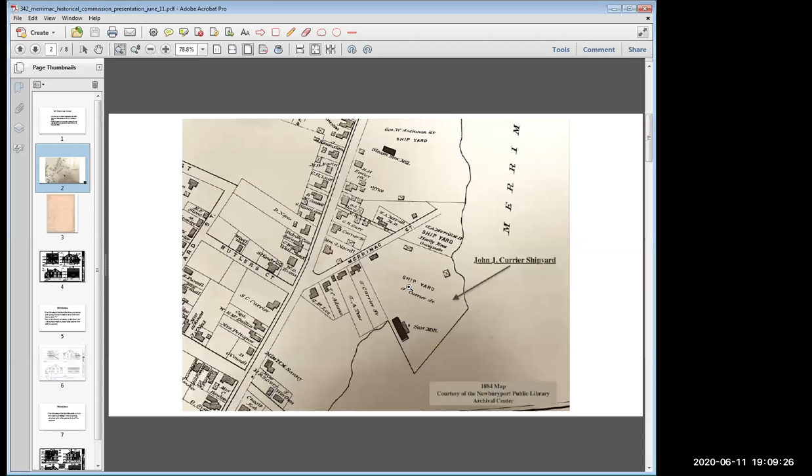What was the date of that one? That's 1884, Chair. So if you go to the next one, there it is, the portico. Is this the so-called Sanborn Map series? That's the 1924 assessor's map. Okay, thanks. So that does appear there.

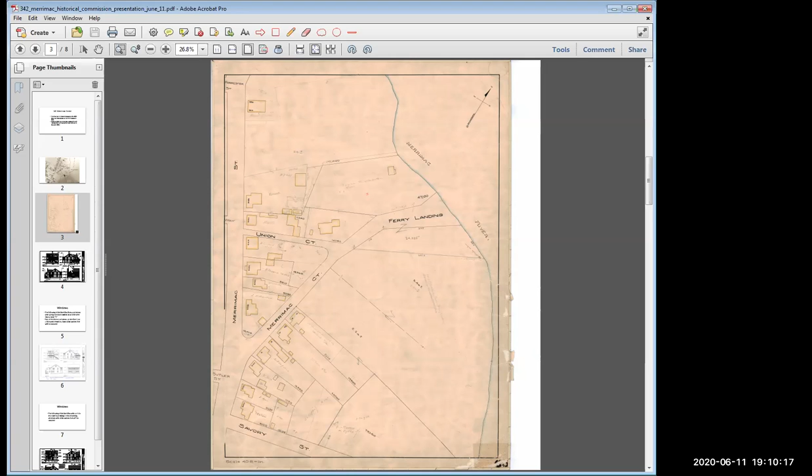Obviously I don't know the exact date of it. The indicators we have are that it was built in that time period, and the historians that did the Form Bs that were reviewed by MHC believe it was built, added after 1900. So Andy, if you could go to the next slide, please.

Thank you. So again, the applicants heard the board, the commission, loud and clear last time, and certainly understand some of the concerns the board had. This plan marks the proposed areas of demolition. Obviously the decking and the extra egress in the back, the two-story shed structure that was later added, all of you I think saw that was needed to come down, so as to expose the gable end of that original L.

We are proposing to take the portico down. That's our preference here. We are leaving the original door on the right-hand side of the building as you face it, with the transom, that's not going anywhere, it's staying right there. We do propose, as you said Mr. Chair, to remove that window to the right of the door, and I'll have Mr. Curie, the architect, go over that in a moment.

And then on the front of the house, the door is not original, but the side lights and the framing around there are. So the applicant is not proposing to change that out as he originally was, but to change the door. And I think most of the commissioners saw that door.

The applicant is proposing to remove the portico. The applicant is also proposing that the later-added Brosco windows with springs be changed out, but that the older windows—which we don't believe are original because there are some screws in them, but are older—be retained. So we are proposing to do that. Andy, if you could go to the next slide.

It's, okay, in this page that Andy's now displaying, it's the one immediately to the right of the door. It's the right-hand one. You go to the drawing to the right of that. There you go. So you see where it says new kitchen window and the arrow pointing to that one. That used to be the same size as the one on the left with the hexagon, but it's 6/6 instead of 6/1.

Right, but it's still a mate to the window that's to the right of that, which is proposed. It's not there yet. That's a new addition that's proposed. Oh, okay. Yeah, correct. I have no problem with that. And Mr. Curie, this reminds me, seeing the detail on this, I believe in my comments back to you guys...

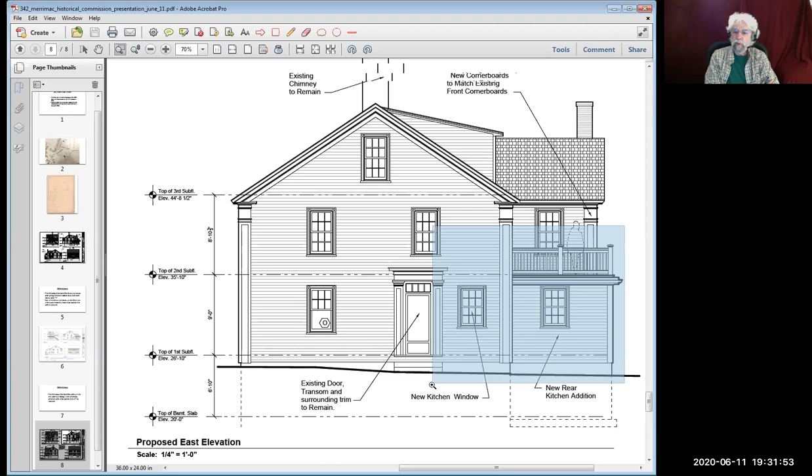If I can be so informal, the standards for putting an addition on a historic house suggest, or recommend however you want to word it, that you not copy the historical trim and molding so that the new construction can be distinguished from the original. So have you thought about how you would accomplish that by not having identical Greek Revival trim on the windows, for example? Just having, let the new addition be a new addition and recognizable as such, so it's distinguished from the original house.

Yeah, oftentimes you encounter that, and it seems to play out differently with every project. There are projects that we do... the best phrase I have is stealth architecture, that somebody, an architect from Falmouth, used once in doing some of his projects, and I know that's not quite the standards sometimes within preservation.

So we have a straight corner board there. We didn't copy the corner board in this instance, and obviously the one-story piece is different with the roof. That's a different element. If it was taken away completely, also as part of the standards, this structure, the original structure would be as it is, intact, and would not have changed. So the jog in, we feel it was nice to separate those planes. The jog out on the other side, slightly out, was a good way to separate this building.

The only thing that is a copycat, I guess, is the trim around the window. And perhaps we felt that was a 2020 nod to the originals.

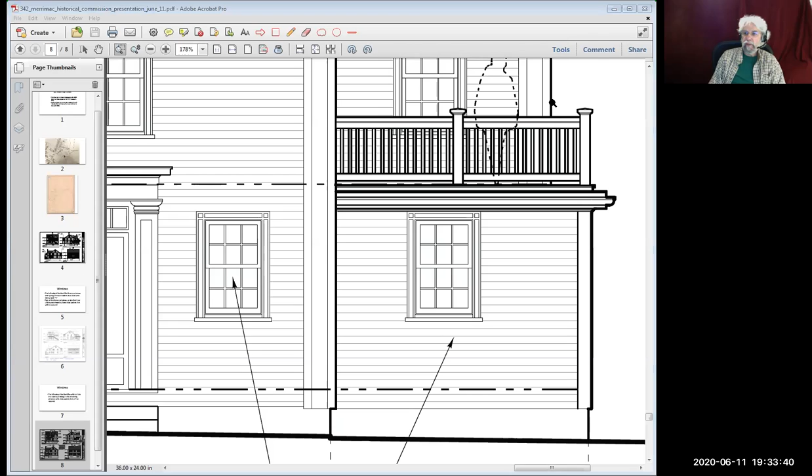All right, and I see Patricia has a hand up, and Ron, your hand is still up. Did you want to add anything more, or is that it? Oh, I'm done. Okay, Patricia, your hand, I think, went back up. Did you want to comment?

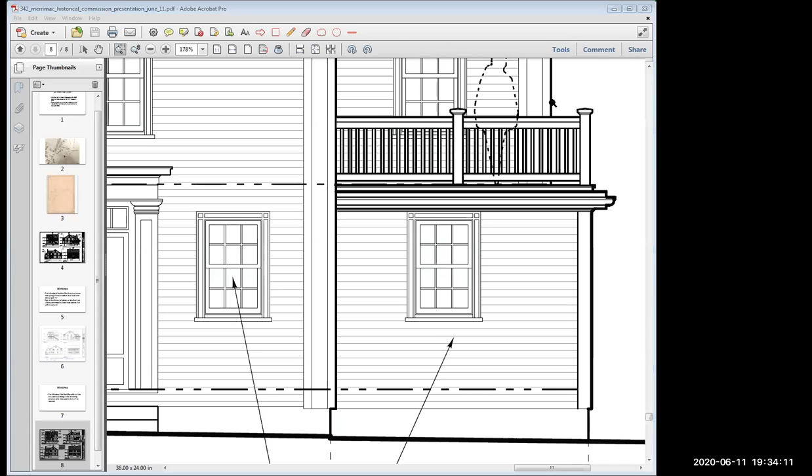One of the things I wanted to hear from everybody about this window—I would find it difficult on a preservation restriction to see new windows being cut or the dimensions being changed. On the west elevation, I noticed there's a new side entry. I like the bracketed overhang. I think even though the door is being cut into the 1880s addition, I don't object, but I'm happy for someone to explain why I should.

And then in the front, last meeting, Mr. McNamee and I were both talking about preferring a single window. I think that you, as chair, and maybe as I heard it tonight, Ron, think that this three-part window, since it did exist on Greek Revival houses, is also appropriate. But I'm wondering what other folks are thinking about those three things: the new door in the west elevation, demoing the historic window on the east elevation, and then this front window. I don't know if we resolved that yet.

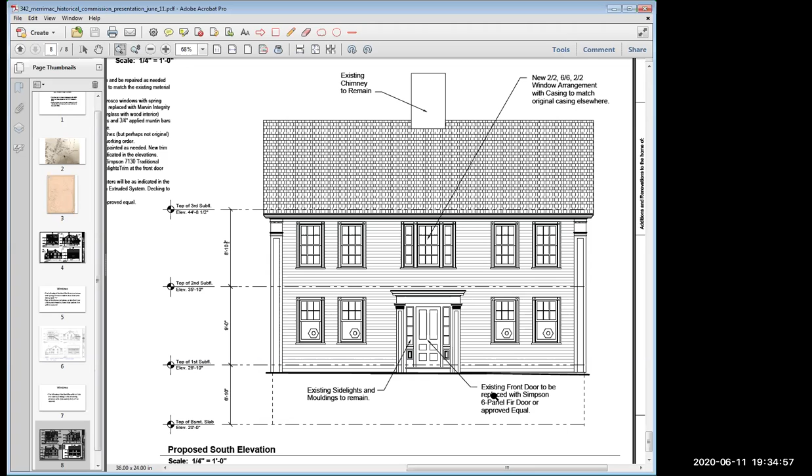Mr. Curie, if I remember correctly, the door that Patricia is referring to is where you're opening a window opening in the rear. Today it's a window and you're making it into a door, is that correct? That's correct, on the driveway side, where there's a mud room. Does that jog in slightly on that side? I can't remember, no, it's more or less flush, maybe inches, but there's trim there, that corner board, that pilaster type thing.

Anybody else on the commission? People have been fairly quiet. I don't see any other hands up, but I want to make sure everyone's had an opportunity to speak if they'd like to. Mr. Morgan, I see your hand come up. You're recognized. Yeah, thank you, Mr. Chair.

I'm questioning the treatment of the windows with the new Marvin fiberglass with simulated divided lights. It seems we're saying that if this is a preservation, and we've decided not to keep the portico, there's some interpretation of this as also being a restoration, a historical restoration. In conjunction with the guidelines for historic windows, I think we'd want to see a restoration of any replacement windows here. If we replace a window, assuming we're not preserving it to its 1980s vintage Brosco series, then we'd want to restore those windows in a more historical material and design, which would be solid wood and true divided lights. That's my major comment. And I'd still want to see the chimney looked at structurally for possible rehabilitation also. Thank you.

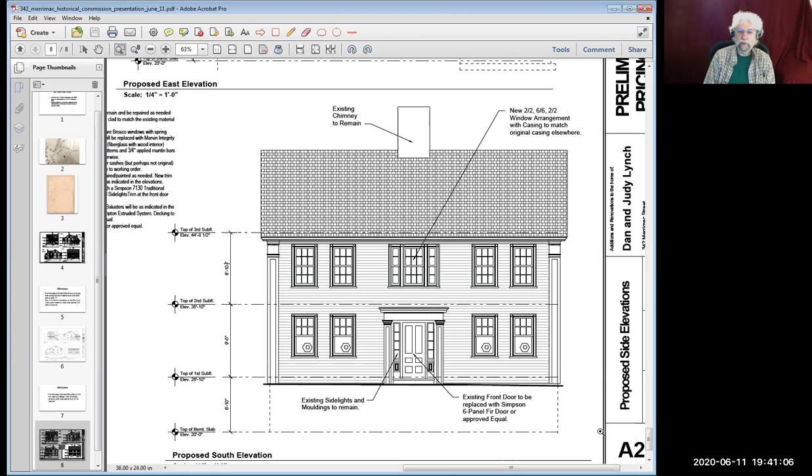It's more of a restoration than simple preservation, because no one is really interested in preserving a non-historic, later-added feature of dubious value, such as those Brosco windows. I don't remember offhand, maybe Mr. Keary or someone familiar with the specific windows can speak to it. Let me see if it's my window.

I can see it's partly cut off, replaced with Marvin Integrity fiberglass with wood interior. So I assume the exterior is fiberglass, the interior is wood.

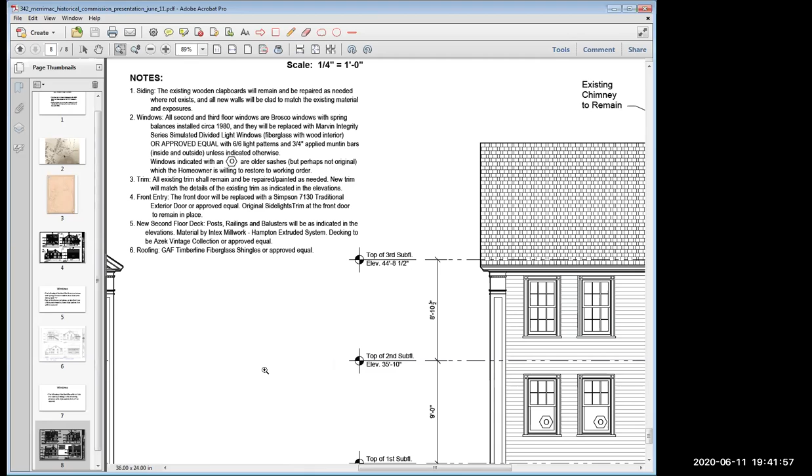Applied Muntin bars, so it's not true divided light. Is it like one thermal pane? One pane of glass that has applied Muntins, and are there any internal spacers, or is it just applied on both sides? Correct, both sides with a spacer bar, so it is what's called a simulated divided light.

As prepared. Do you have any specs in your plans as to what the profile of the Muntins are? Mainly on the exterior is what we're concerned about here. It's a putty glaze look. We don't have that in the plan, only the spec, not a detail of that window.

Patricia, I think your hand's been up for a while, did you want to jump in with a comment? No, I just wanted to second what Mr. Morgan said about true divided lights and applied Muntins—it's sort of cringy to think about that—and also what he said about the chimney.

I also wanted to say that Bob Yarrow, the urban planner mentioned on the updated Form B, is now at the School of Design at UPenn. He said he was pleased to see the Lynch's plan for restoration of the front and side facades of this house, which has a very special character and history, and he was amused to be listed as a person of great renown on the updated Form B.

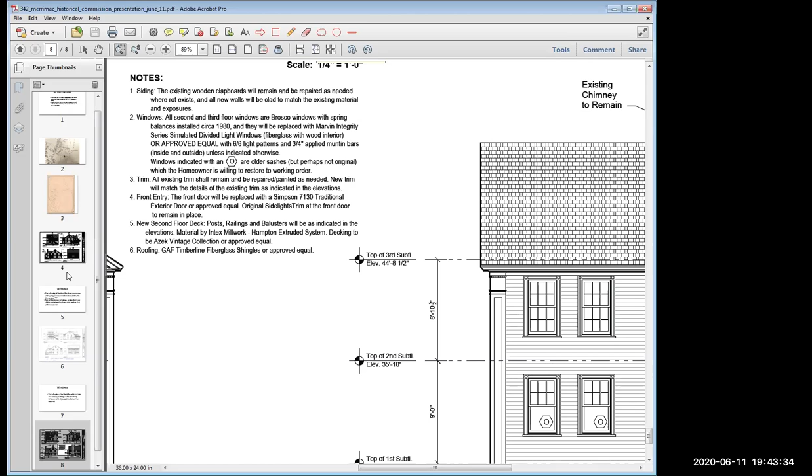Thank you. Mr. Chair, if I could answer a couple of questions—my clients have agreed to keep the kitchen window. You can make that a condition of the decision, since that plan will have to change, so that kitchen window on that side would stay, and they'll make the adjustment on the interior, as I'm sure you're familiar with.

And I think Mr. Curie has the dimensions of the Muntins for the windows above—David can speak to this. So all the ones that are not original but old on the first floor at the street level are going to be restored, right? And those are the public view and most easily accessed.

There's some work to be done, certainly for insulation, when you're redoing a house and trying to update it to reduce problems with air infiltration. The commission in the past, and the city generally, has been okay with these windows, particularly that Marvin Integrity series, where you have wood on the inside.

And since it's the putty-like, 3/4 inch raising, and they're on the second floor and not easily accessible immediately from the street, we would like the board's consideration of that. I understand where the board's coming from and what they're looking for, but in this instance the windows are Brosco spring-loaded windows on that floor and in other places.

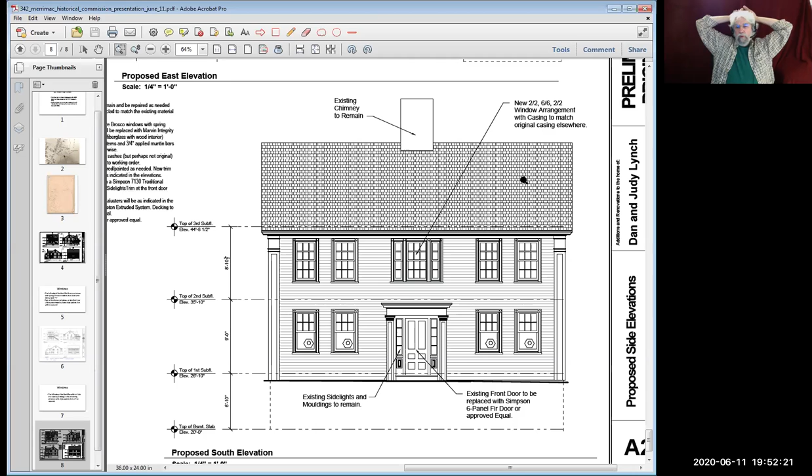I think, as Peter just said, the single window is preferable to the two fixed side windows, similar to, echoing what's below in the front door. That's a bit of a stretch, but I can sort of live with that. But I think the most authentic—or put it this way, the most reliably, historically, probably accurate—would be the single window.

So, it sounds like the sense is that I'm hearing a strong sentiment that the windows should be true divided lights, where there is such an emphasis on restoration here.

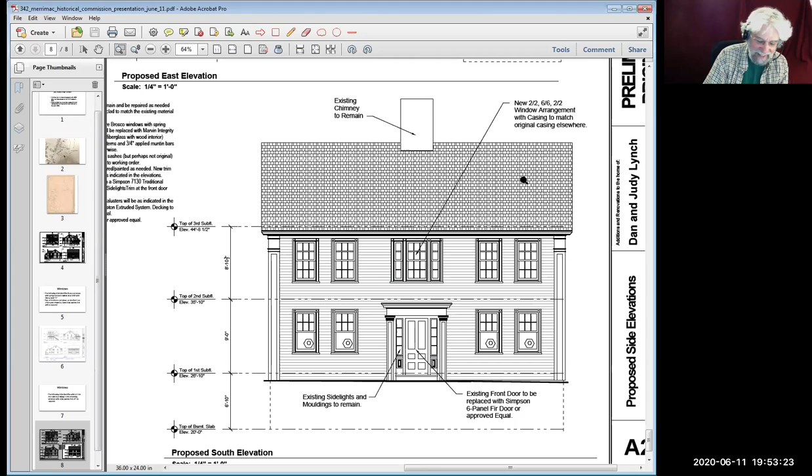So Attorney Mead, do you want to kind of help out here? So the applicant, may I just first say thank God for texts. All right, so the applicant will do a single window over the front door, and then he will also be willing to do true divided light wood frame windows.

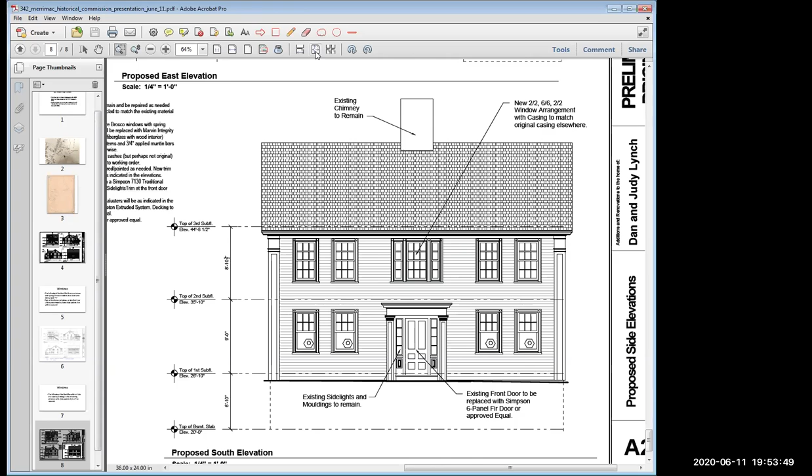And here's my question. Obviously on the front, as you go to the side on the original structure, there also. But on the back in the addition, can he have the choice to either do single wood frame true divided light or the Marvin proposed? Which windows are we talking about here, up on the dormer or the second floor? I'm suggesting all of those windows, he have the choice to either do the single divided light, the wood frame divided light, or the Marvin as proposed.

But I see, right, but on the front and on the sides of the original structure, if you have true divided light, the larger box, the original structure - unless you want it over that L, to have the divided lights.

Just let me clarify what we're talking about here. When you say that, it sounds like you're describing a wood framed 1/1 window versus the Marvin Integrity 6/6. No, the same lights, but the true divided - meaning wood frame, true single divided pane of glass. Correct, or that is 6 individual panes of glass divided by muntin bars.

On the front or the rear? I was trying to clarify the rear. On the rear, I want him to have the choice to use the Marvin Integrity window he has proposed, on all of those windows. Or what was the other option? Well, you're asking for true divided lights. Oh, I see, okay, so in other words, so it's simpler then - you're just saying would we permit the option to go with the Integrity series on the rear where it's not quite as sensitive? Correct.

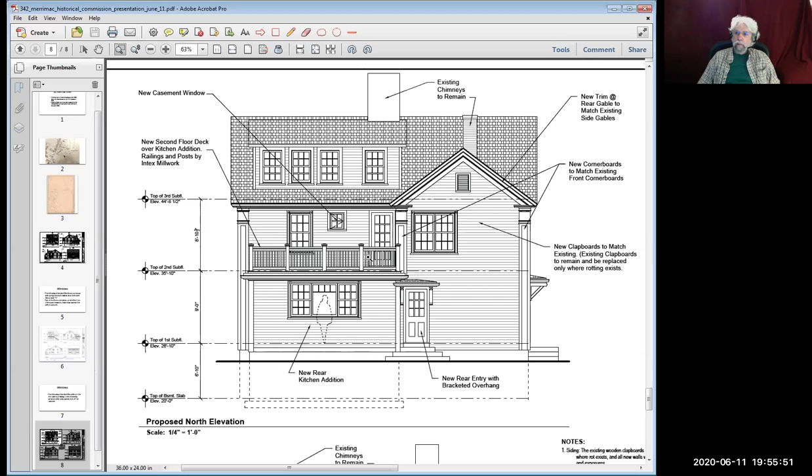Well, okay, especially in the new section, which would then be - certainly the kitchen addition, certainly without question you have the flexibility there.

So let me turn to our fellow commissioners, or at this point I think we could even entertain a motion, if it could be worded in such a way - we might have to tune it a little bit, it might get a little wordy, but I might take a stab at it. But anyway, how do people feel about that? It sounds like you have...

The main concerns we had coming into tonight were, starting with the smaller items, the window on the side, the upper right in this particular drawing we're looking at - that's been resolved in favor of preservation. The windows on the front and sides, the most historically and most visible sections, to have wood frame true divided lights per our preference. And finally, in the conjectural reconstruction of the front, to have a single window there.

So it sounds like at least the concerns that I was aware of going in have been answered. Does anyone on the committee disagree? Because if not, I'll try to word a motion to move this forward.

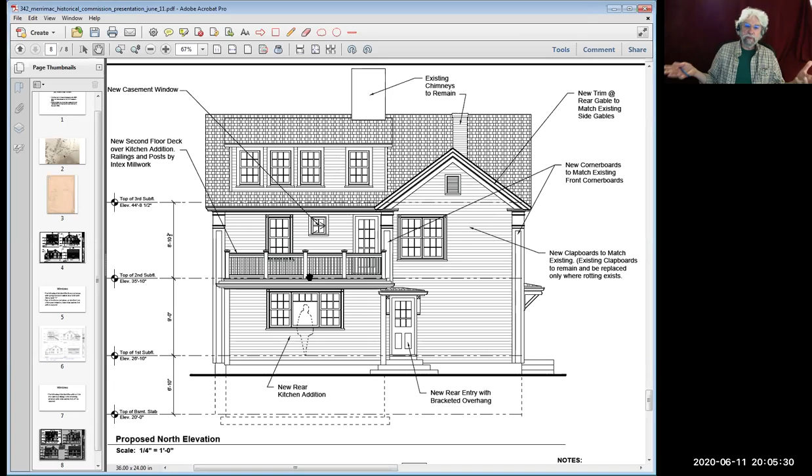The other windows are already newer replacement type windows. So what would be the issue with... the applicant would like the option of using the Marvin Integrity Series there instead of the full wood frame.

I apologize, but I'm going to interject again. I think Dan would be willing on that one 6/6 that is currently a Brosco to do as he's doing with the others, but the new ones that don't exist yet, being in the kitchen and up above in that gable, I believe those are the areas where he was asking the commission if he could go with the simulated. Thank you for that clarification. That sounds like that was Mr. Curie speaking.

Yes, sorry. So Joe, consistent with what you said a minute ago, where replacements that are not part of any historic section of the building could be Marvin Integrity or whatever, but the windows that are part of the historic structure and part of that restoration would be wood framed 6/6, true divided light, etc.

So it sounds like, and we would get this all down in writing too, that condition has been satisfied. If that's the case, would you be a yes vote? Yeah, I'm fine with that. Okay, now we're back to you, Patricia.

So yeah, I'm fine with that, and the single window over the front door, and keeping the east elevation kitchen window, but allowing the door added on the west elevation. So if that's all part of this, then yes.

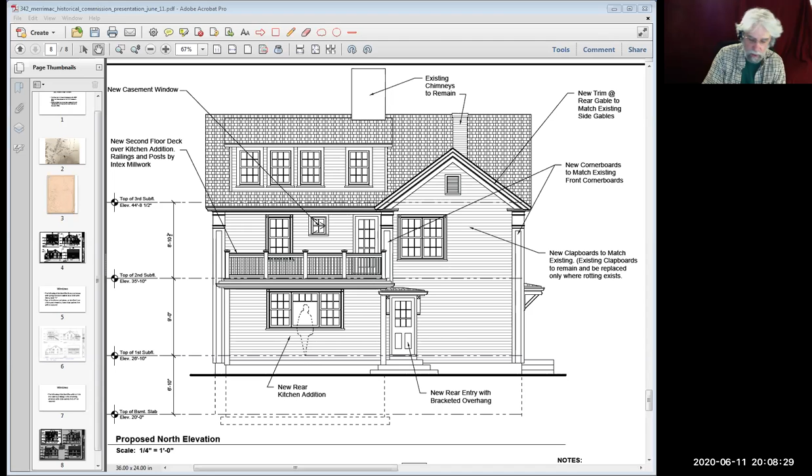So I'll follow up with you similar to the way we followed up after the first meeting 2 weeks ago. Is that acceptable? That's great.

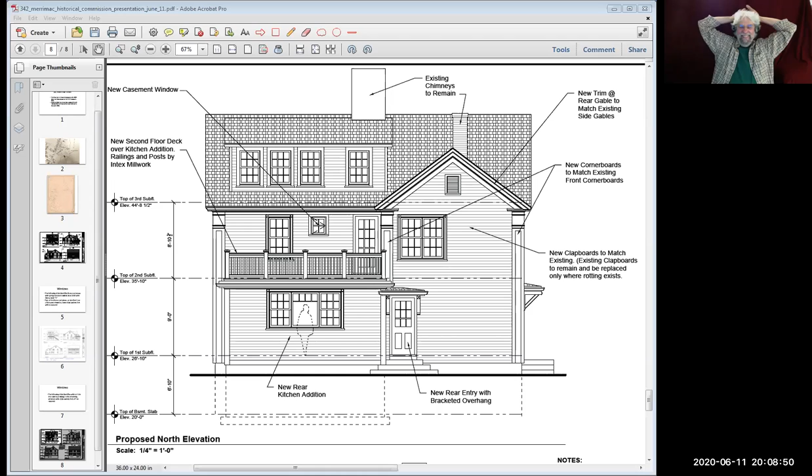And just so the commission knows where we go from here, this isn't the last you've seen of us, I'm sure you're disappointed in that. We will be going to the planning board now, and hopefully after they are done, they will make a condition that the Mass Historic and the Planning Historic Commission have to approve the final preservation restriction in full. So we'll come back to you when we have a draft of that document, all the appropriate attachments, and the revised plans according to your motion.

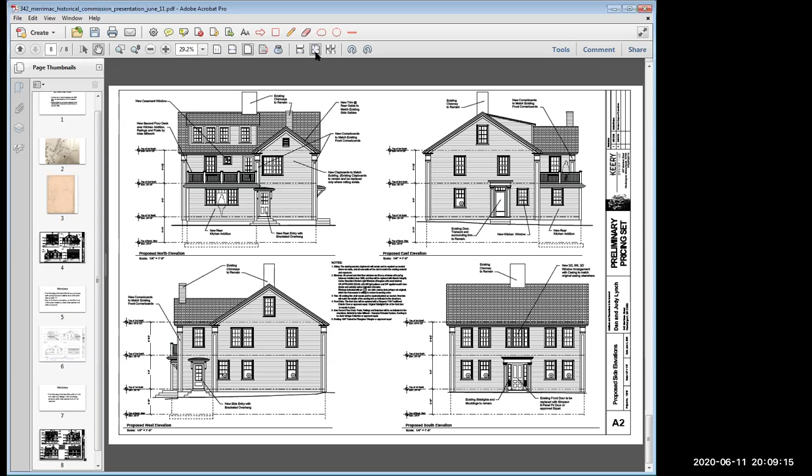Yes, and actually thanks for reminding me about the planning board meeting next week. So what probably will happen is I will share with you, I will draft a report for the planning board so that they know how we've resolved or decided to move forward on this.

And I believe you're correct that they will want to know all the details and make sure that whatever is to be specifically preserved is spelled out, and what's allowable to be changed, and so forth. So we'll do that the best we can. I know I'll be wanting to get that to them ASAP so they have it in time for their meeting next week. Thank you.

Okay, very good. Thank you all, that was a lengthy but important discussion. I appreciate all your comments and the thought that went into it, especially my Vice Chair Patricia, and Joe, and everybody really, everyone for your comments.

Let us try to move on now to 39 Harbor Street. As you can see, thank you Andy for displaying the agenda again. This is 39 Harbor Street, I believe, a residence on Plum Island, appears to be quite near the water, actually, from what I saw of the plot plan.

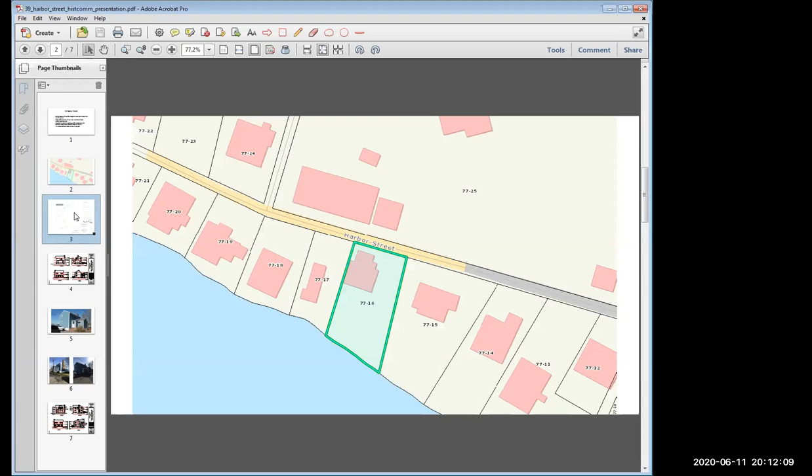So here we have the site plan, and if you can just zoom in, Andy, and show that second floor addition there, where it's indicated that it is within the same footprint. We're not expanding the footprint, and it's 164 square feet. Can you go to the next slide, Andy?

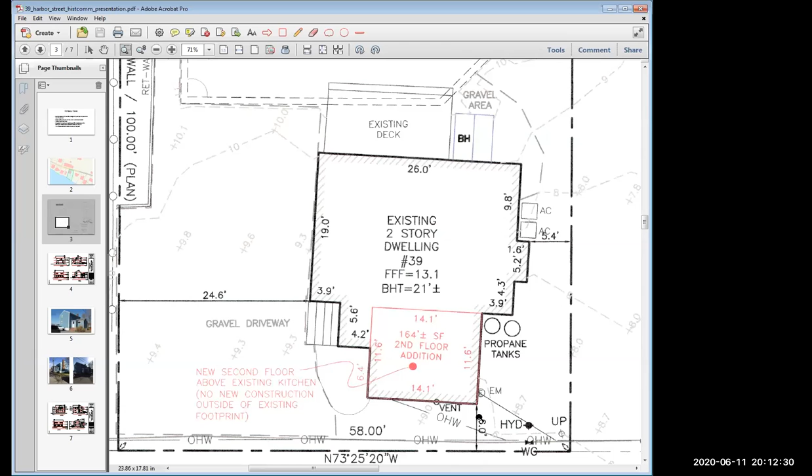And then the next slide, please. This is Andy, just folks, I apologize, there's actually a momentary delay when the image is changing, so apologize for that. Yeah, they're coming through pretty well, Andy. So it hasn't been a problem so far.

Well, thank you, Marisa. Scott Brown, the architect for the project. Well, there's not a whole lot to say about this small project. I think what we're doing here is very simple. I was very surprised to learn that this house is 120 years old. And while there may be some old bones there, I don't know where they are. The house has been completely reworked over time.

The house even has a concrete block foundation that we could actually see in some of the images that we provided, like slide 5. I don't think that this type of concrete block was even widely used until way after the turn of the century, probably more like mid-century. So this is an indication that this house was lifted up and likely rebuilt at some point in time. Can you go to slide 7, Andy?

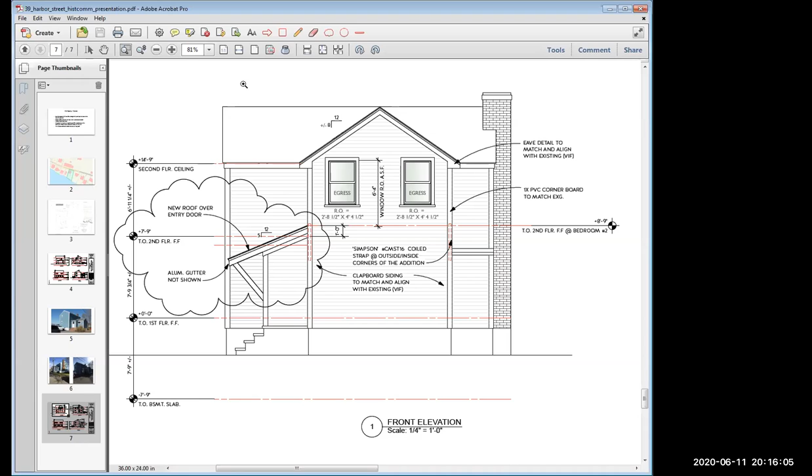Yeah, those 2 windows that we're seeing there, they're both labeled egress. That's our new addition, which is over the existing kitchen, which is going to remain intact. Okay, all right, thank you very much. Thank you, Scott.

So, I think this is, as you say, pretty straightforward. Does any member of the commission have a question or seek clarification or comment on anything that we've heard?

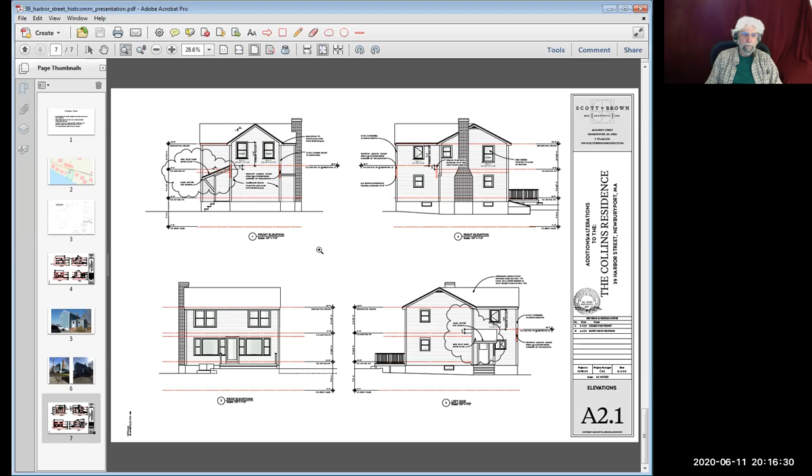Mr. Fay, I see a hand up. Yeah, I'm just, the small, is the large part, so my guess is, is the large part of the house the back of the house?

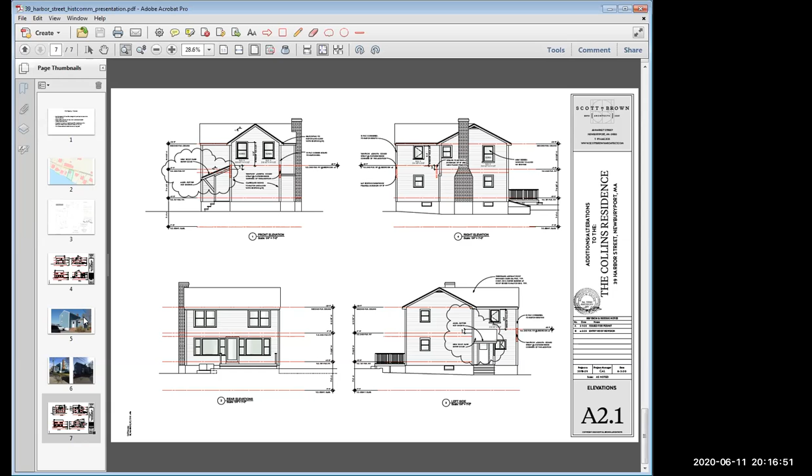Well, that would be the front of the house. That's actually on the water side. So if you can maybe pull up, Andy, pull up the site plan, maybe we could point that out. Yeah, so the kitchen is actually at the front on the street side, and the main box is on the water side.

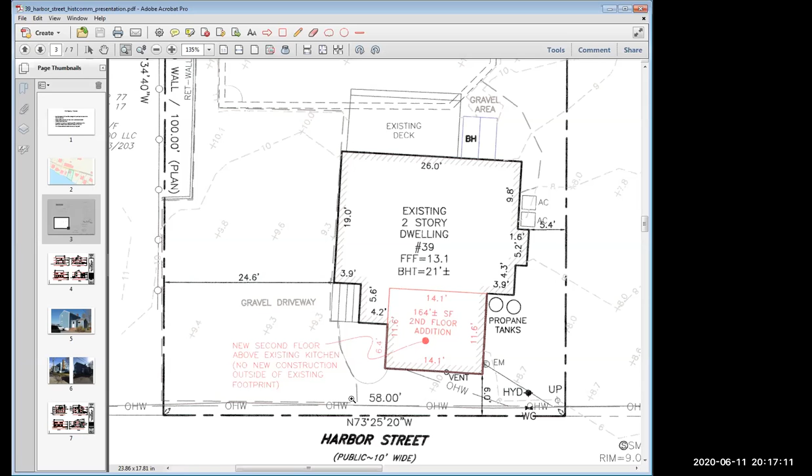Okay. Main box is the larger portion. The smaller portion is facing the street. Okay. Correct, yeah. All right. That's all, it's just unusual, I think. But yeah, it's a bit odd, a little unusual orientation, an unusual setup.

I'd like to think what we're doing here is an improvement from a massing standpoint. Because it does seem so odd that bumping that up in front, I think, is going to improve the appearance of the house.

Okay, thank you. And Chris, you can see in this picture, if you look at the lower right corner, I believe that is the street, and I even think I see a fire hydrant there. So you can see the view from the street - you've got the gravel driveway on the side, and what would be considered the main or front entrance is kind of facing sideways toward that driveway. That in itself not all that unusual, but the orientation is obviously toward the nice view and that sort of thing. Okay, great, thank you.

Yep, you're welcome. Any other comment? If not, I would like to make a motion that we determine that the structure is not historically significant. Anyone care to second that or not? This is Joe. I second that.

Okay, so I'll go around the table here, just going in the order people are showing up on my list. Ron, you happen to be on top again. Your vote, Ron? So this is on the vote on what now? On determining that 39 Harbor Street, the house is not historically significant. Okay, yes. Peter? Yes. Mr. Fay? Yes, I'll agree. Patricia Pecknick? Sure, sure.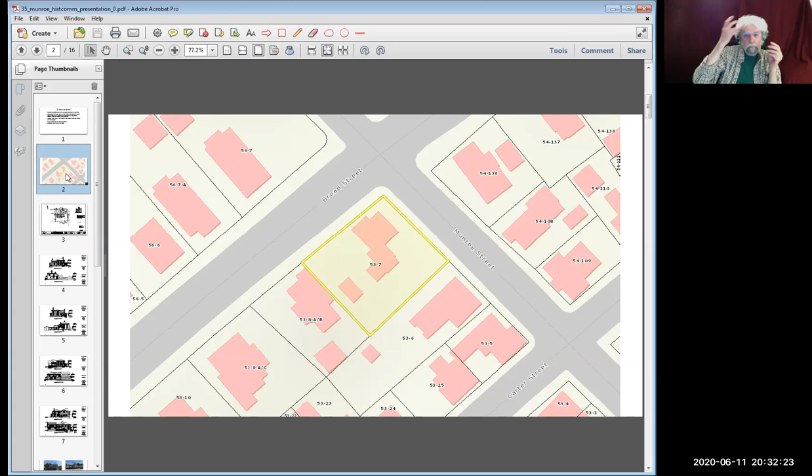So you can see from this photo, and then we provided some earlier assessor's photos, and the vice chair actually found an earlier Sanborn map for us showing that some form of this footprint, but for the later-added sunroom entirely off to the left, has existed over time. The district data sheets indicate that the structure was altered in the 1920s. Looks like some form of an addition near or around the same location existed back to 1894. The district data sheets indicate it has been altered in various locations on the additions on the back, certainly not the original box of the structure.

So presumably we believe the alteration occurred to the kitchen, pantry, and second floor bathroom that we're going to talk about -- and using the term second floor on that rear addition is being generous. There's a first floor sunroom off of that addition. That footprint of the sunroom is not on the 1924 assessor's map, indicating it was added at some later date.

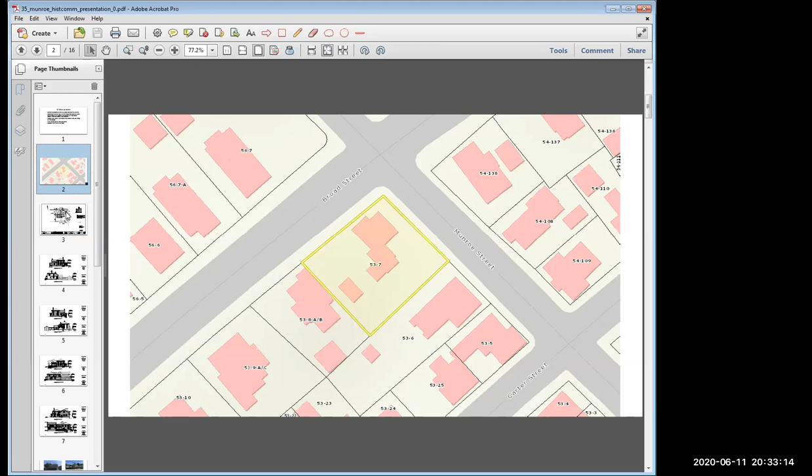So Louise and Eric proposed to demolish this two-story addition extending from the original structure towards the south, as well as the later added first floor sunroom.

The existing two-story addition is 2 to 4 inches out of level. The single-story pantry off the kitchen at the southernmost portion of the structure is sinking and does not have a foundation.

The pantry from the ceiling to the floor is under 7 feet. While one side of the pantry is on the same plane as the kitchen, the opposite side has a 5.5-inch step down demonstrating its sinking structure. It might be good now to go to those photos because they're pretty clear.

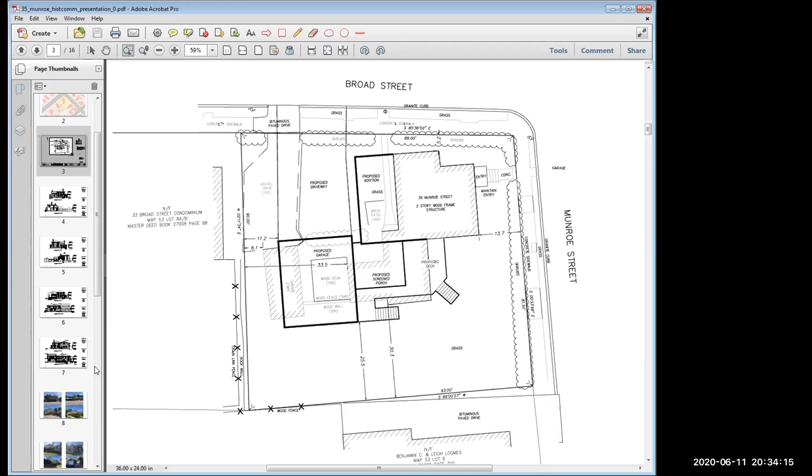So again, we have the photos from the neighborhood, and if you could go to the next set, we get a little closer up. So we're proposing—

The later added sunroom, you can see with the bigger windows, that was added after 1924. Then you have the little shed attached structure off the back with the L. Those are also proposed to be removed, and you can start to see how they have a foundation problem.

If you could go to the next set of slides, Andy. And again, we have a larger view, then next slide, 11. So then you start on the right. This is the engineer we hired, as well as Eric, who started to take photos of some of the things I'm going to describe to you.

So the roof over the pantry is not suitable for snow loads, and the window on the adjacent addition sits directly on the roof of the pantry, prohibiting renovation of the roof to support snow loads. If you want to go to the next slide.

So you can see here the kitchen wall addition that was discovered when there had to be a repair. It has bricks holding it up instead of wood beams, and you can see that in the center line. You can see the kitchen wall foundation that is failing.

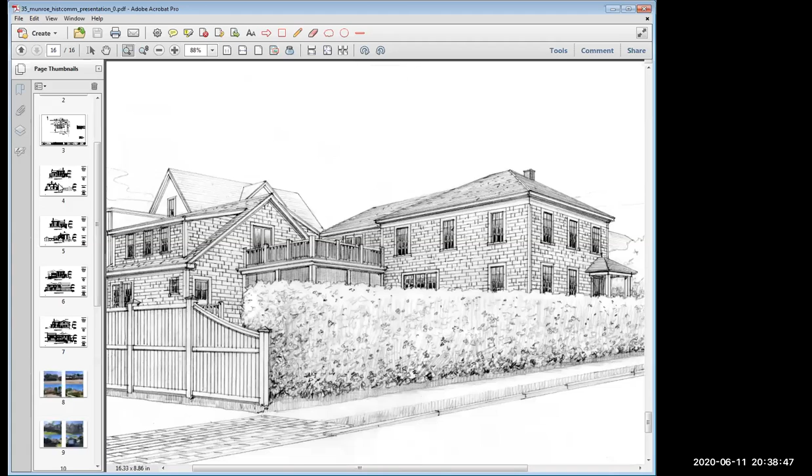So what I'd like you to do, Andy, is go to the architectural drawings - the line drawings. Well, this is the finished product, but if you can go to the line drawings, that would be great.

And I'm going to have Eileen talk about what she is proposing to do. Thank you, Lisa. So, Eileen Graff Architects, 2 Liberty Street.

So these elevations are a great place to start to help orient. Lisa has already given you the description of the corner. This front elevation, this top drawing, is the elevation that faces Munroe. You can see the original hip roof structure there, the 1850s structure. There's a one-story piece to the right, also part of the original structure. Then to the left is the structure that, in pretty good depth, Lisa has reviewed - the addition experiencing some structural challenges. And then of course the pantry is the one-story shed roof to the left of that addition.

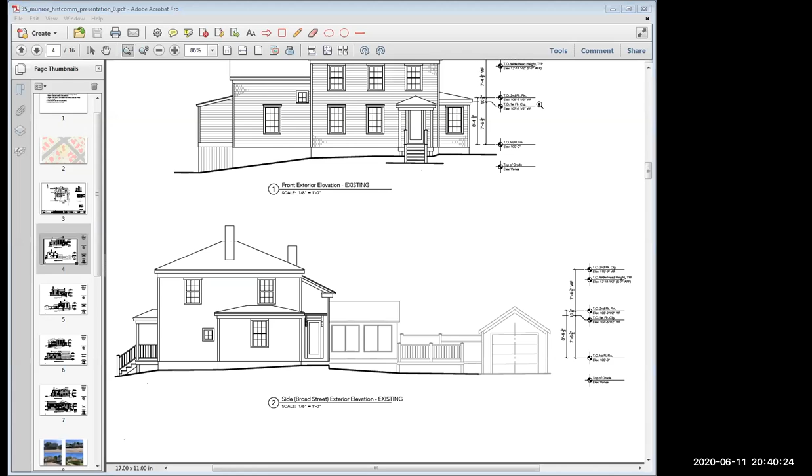And then if you slide down to the bottom drawing, you can see the Broad Street view of the hipped roof, the one-story hip as well, part of the original 1850s. Then the first piece you see to the right with the door is the gable end of that addition. Then those large windows are the sunroom, and a series of fencing and decking that then attach to the garage. And then we could slide to the next - everything looks pretty straight there.

So this is the view - if you had, is the backside from Munroe. And so what this actually shows, again, the hip roof helps orient you on the original structure. Then to the right of that is that addition.

What I want to point out in this addition is if you look at the edge between - see the double window on the first floor level on the original structure, and then you see the corner board of the addition. If you look just about 3-4 feet to the right of that is a dash line. What I want to point out is that from that dash line to the corner board, that piece was yet another addition. While the first addition, I'll say in the 1894 map, shows up from that dash line to the right, this dash line to the left, this piece that's sort of glommed on, shows up in the 1924 map.

So even though we see these forms as addition after addition after addition, there's even some buried in there. So what we feel is sort of an unfortunate addition there is that with this 3-foot addition, we lose the corner of the original structure by them glomming on more of this gable roofed addition.

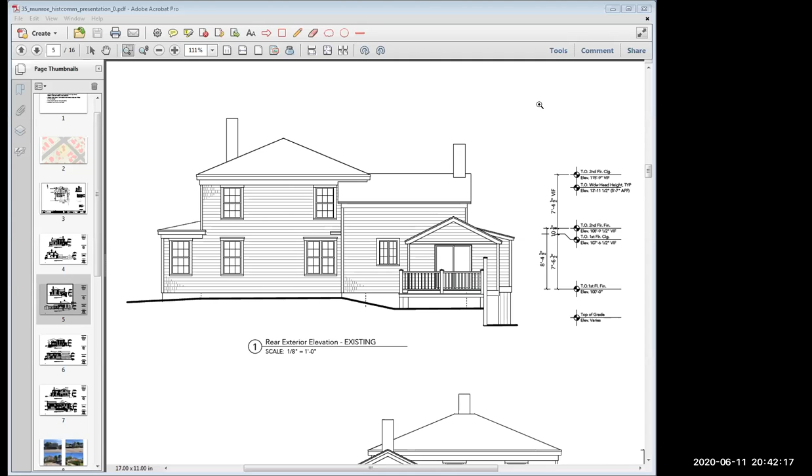Yeah, looks like that dotted line looks like it's where the original structure was, because you could see it lines up with the roof line above. Correct, that's correct. And it makes for really strange conditions on the interior as well, with that sort of a glommed on corner there. And then the bottom drawing here, as we've seen in photographs, a great assembly showing the evolution of all these additions.

But I want to pause on that bottom one just to help explain, as we've seen in some of the photographs - I want to give a sense of scale to this property, starting with the original hip roof structure. It's modest in height. The first floor is 7'6.5". The second floor ceiling heights are...

7'4.5". So if you look to the second floor 6/6 windows of the original, I want to point out that the sill of those windows is only 16 inches off the floor, with the head height of those windows at 5'7". To give reference, the modern day typical house is built with head heights of 6'8" - so it's a good foot lower than a typical modern day building.

And so if you travel to the left and you're inside, as Lisa mentioned already, when you're trying to get from the original structure to this addition, the doorway - as you can see, the gable roof there is lower in eave height than the original structure.

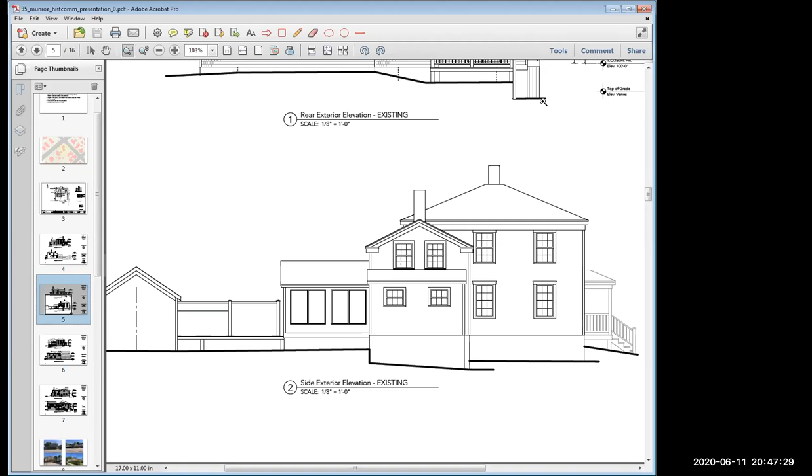And so we are proposing that we move this living space to the back of the original structure. So now if we could switch to a proposed drawing, that will help explain in elevation.

Well, while Andy is switching—Marissa, how's the foundation under the old part of the house, the original part? Is that more or less sound? That's sound, yes. We have no issues with the original, including that 1-story piece to the right of it. They love the original house, so we have no problems there.

So here you can see that original addition is removed, and what you see to replace it is both the garage and, above the garage, the in-law suite, and then in front of that is a screen porch that connects the two. What I want to point out in this elevation is that it's a little deceptive in a line drawing in 2D, the planes in which these are all sitting.

We do have another rendering that can help demonstrate this, but what I want to call out is the face of the original house actually sits 25 feet in front of this screen porch that you see. The screen porch essentially sits on the back line of the original structure. Then behind that, another 16.5 feet is the gable end of the garage beyond. So really 42 feet behind the original face is the proposed garage.

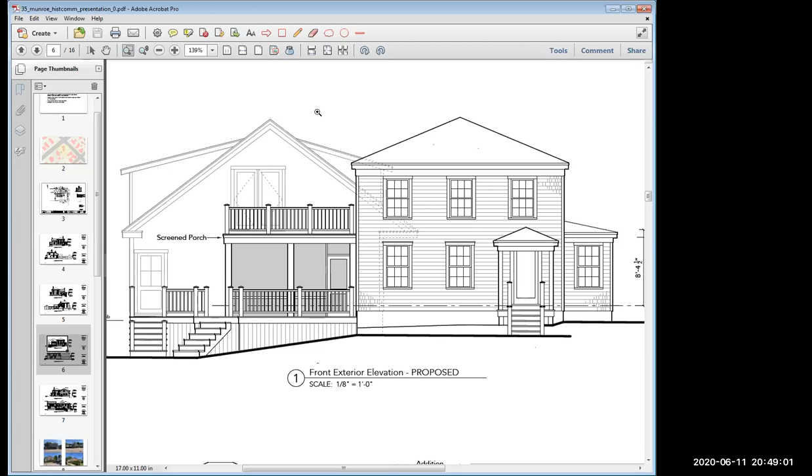And then if we could slide to the next drawing—thank you. This helps describe the addition on the back side. So here you can see the original hip structure, and what we're proposing is...

With the added footprint, it goes out 12'6" from the original structure, and part of that is 1 story, as you can see to the rear of the original 2-story. Then there's an addition of the 2-story. We've stepped in width—the 2nd story is actually narrower than the original structure. So you see a change in the ridge height, and you see and respect the corner of the original building. That was important to us, that we are not burying, we're actually exposing and celebrating the original structure there.

And then to the right of that, you can see again pushed back and in more faded lines, the garage set beyond, and above that is the in-law suite.

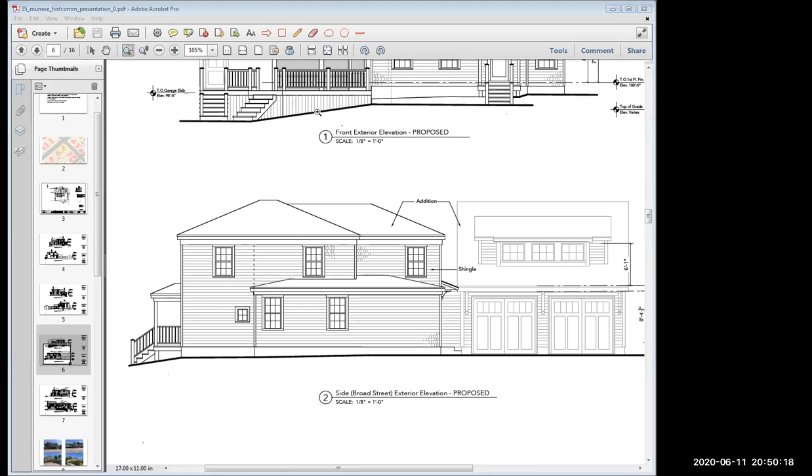So on the next drawing, this is the rear of the structure, opposite the Munroe face. Here you can also see that step in width from the original hip roof on the second story. And in front of that, in this garage plane, is the gable for the garage and the in-law.

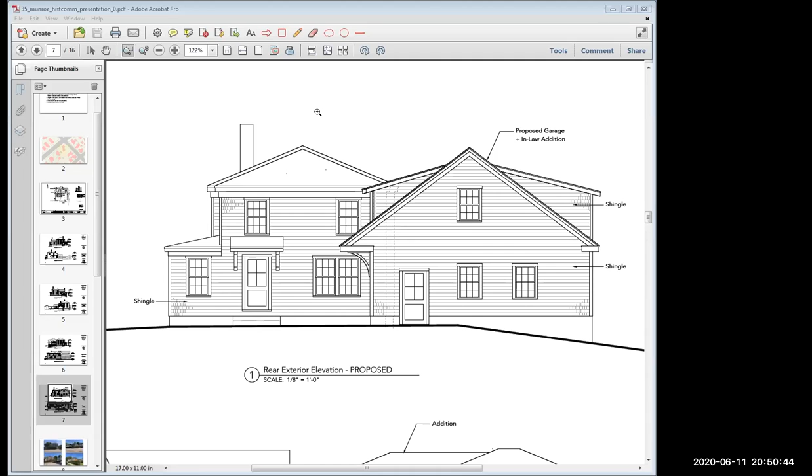This is opposite the Broad Street facade. Here, once again, is the original structure of the hip, and then traveling back 25 feet from the front face is the beginning of the screen porch. And then the garage and in-law structure on the back.

And while we've moved the living space towards the Broad Street side, the feeling, what it does for both Louise and Eric, is that it ends up allowing them to put the living space on a side that is more public, in the sense that it allowed them then to free up the yard. As you can see, they put the deck there. That's the space that they enjoy.

It has the most privacy. It's quieter on the Munroe side. It's the brighter eastern southern light, so they enjoy their coffee there in the morning. They really, by having the structure that was there, saw a great opportunity by shifting it to the rear of the original building so that they can expose more of that space for the more private and less exposed to Broad Street, where you couldn't really create privacy with the garage and driveway off that side. So they saw this as a huge improvement to how they could live.

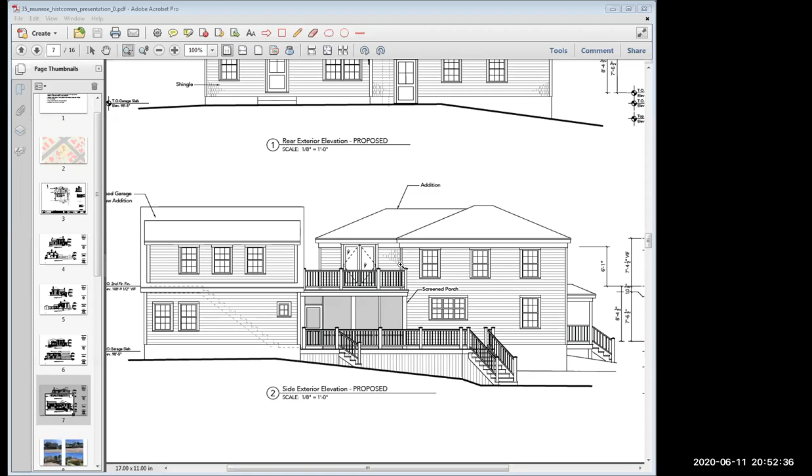And that, I believe, covers everything, but I'm happy to touch on materials. The existing house has shingles, which they actually love, so we have proposed that to continue elsewhere. The windows are 6/6. I can't say that they're historic, they've been replaced, and they are vinyl windows, but we would like to maintain the divisions and style. So we are also proposing 6/6 windows on the addition.

And at that, I can conclude my architectural review of it, but I'll let Lisa take the lead back.

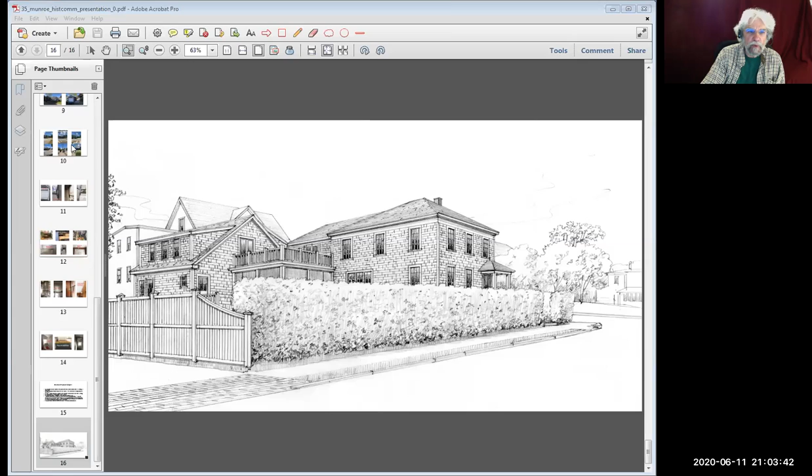Thank you, Patricia. And Chris, I see your hand up, but I had a quick question before, and then I'll recognize you, Chris. Andy, could you go back to that last map we were looking at? I'm sorry, I don't know what page it was. Hopefully you remember what page you were on. You had that map that you zoomed in on. Yes, there you go, thank you.

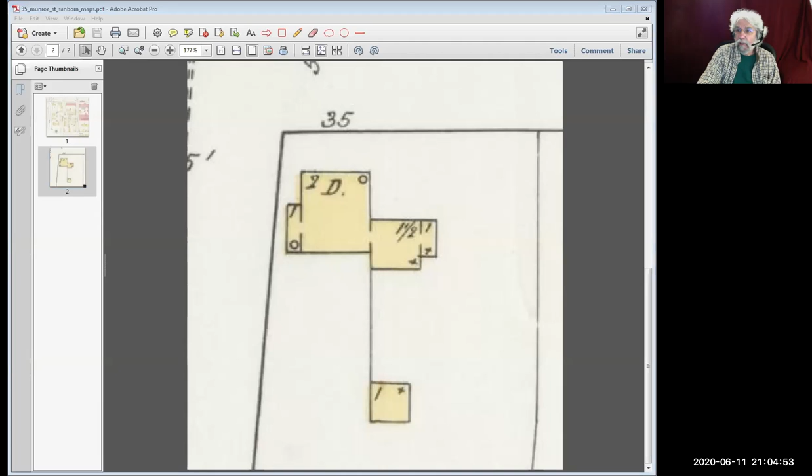Okay, thank you very much. Chris, what did you like to say? Yeah, I just wanted to chime in, especially on the roof deck, not surprisingly. I'm not in favor of the roof deck. I wasn't really in favor of the roof deck on the one we talked about earlier this evening, but I know it's in the back. But this is clearly visible from a very popular street, walking up and down the street on a regular basis. There's a lot of foot traffic right now under our circumstances.

And I can appreciate the work that's gone into this. I can appreciate wanting to have coffee in the sunlight. I think Patricia put it well. If this is a working person's home, I think it has to be recognized as such. And not to be glib, but there's no time for morning coffee if you're headed off to the mill.

I just feel like we have to be consistent with that, and we've been consistent with roof decks, with one notable exception recently. So I just want to strongly urge, and the screened porch as well, I would say. So a modern sort of, I don't know what you'd call it, 60s incarnation, maybe earlier, I don't know, but that's what it seems like to me. So thank you. Thank you, Chris.

Anyone else have a comment or a question from the commission?

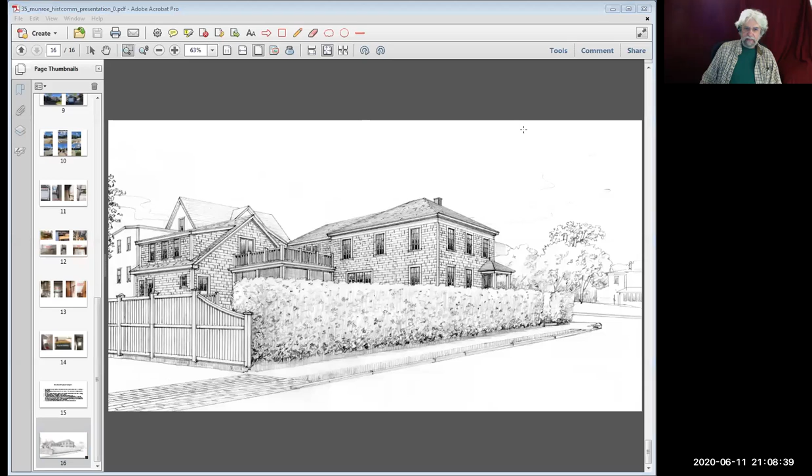So the other comment that I think the report would need to state is that we have, as a commission, Chris is quite correct, on those areas that are highly visible to the public, and in districts and structures that are 19th century and older, roof decks typically are kind of incongruent and therefore discouraged. And I'll be happy to include those comments in the report, as well as some concerns about the size.

I think the ZBA will have to decide about the size. I think there's only so small you can make it and still have a workable, or livable, I should say, living quarters above for what's called an in-law apartment still traditionally, but they're really calling it now an accessory residence. I forget the exact terminology because it used to be where you'd talk about grandma or whatever, but now it could be children of the residents moving back home, could be almost anything, but I think the zoning still does require it to be a relative of the owners. Yeah, did you, I'm sorry, were you trying to interject something there?

Was that Ms. Meeks? Yeah, I just wanted to comment on that. Newburyport hasn't changed the zoning yet, although prior to the COVID situation, obviously people were working very diligently on that, to change the terminology and how it works. But under the Newburyport zoning, it's an in-law, and it is required to have a relative in there, and we will need another special permit from the zoning board on that.

And I did just want to add one other thing relative to the roof deck. Of course, we're here before the commission for you to determine that there's essentially no reasonable use, or that the rehabilitation of that particular thing we're asking to remove is not reasonably feasible, which I think it sounds like everybody's pretty much in agreement on. I've attended most of your last meetings, and I've certainly heard the comments from the commission relative to roof decks. However, the city has no ordinance, policy, or regulation relative to design review and roof decks. And I certainly hear what your comments are, but there is no basis upon which a resident of Newburyport would be advised in advance that roof decks are not okay.

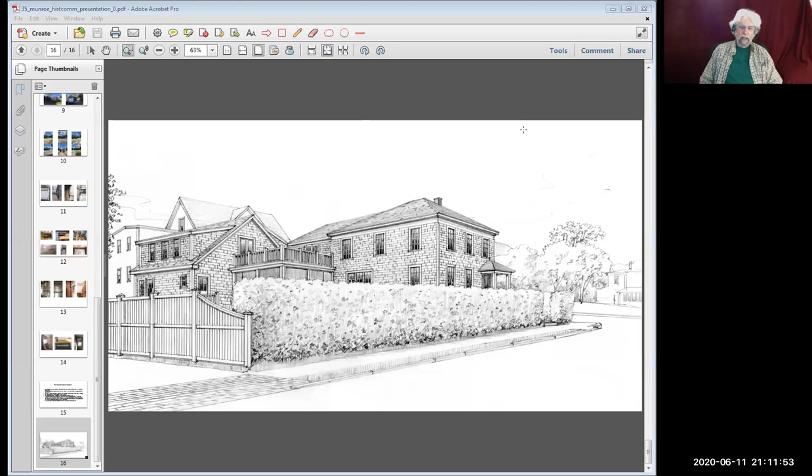Okay, well, your comment is noted. I accept that what you said is true about there not being anything encoded into any ordinance about that. Notwithstanding what Mr. Fay said is also true about what we've been recommending as part of our design reviews and so forth. So, design review is my point. Pardon me?

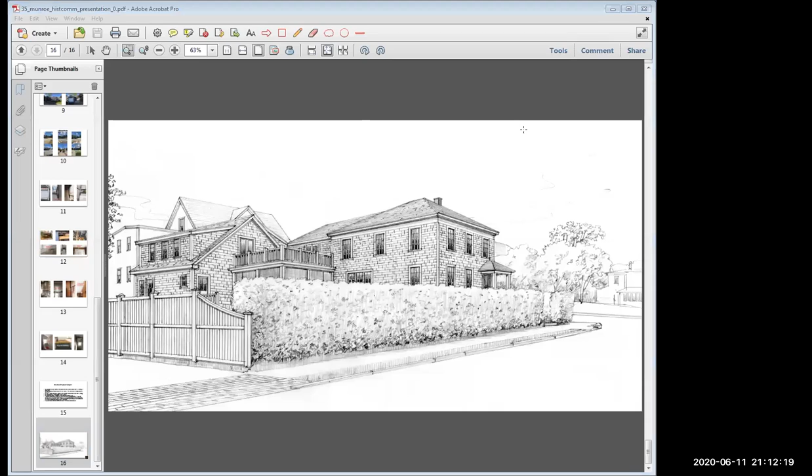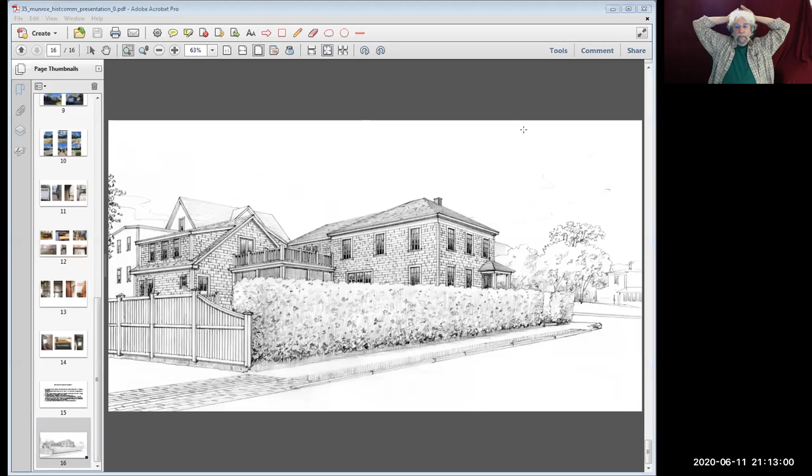The function of the commission at this moment is not design review. It's to make a determination to recommend or not relative to the removal of this addition that's being proposed to be removed to the city council. We do not have design review. Well, we'll have further discussion later about how far our purview extends. My understanding is that's basically correct, but it doesn't mean our report can't include commentary, which the ZBA is free to ignore or consider, as far as things that relate to the historical significance of the structure and its locale.

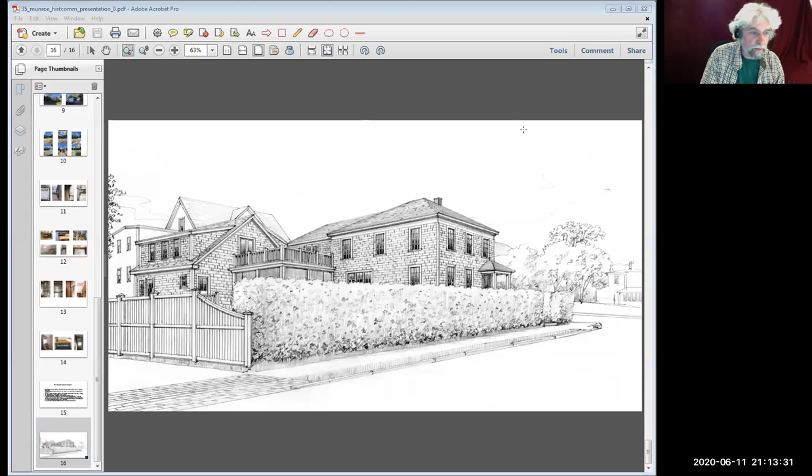So I think I have enough to do the historical report. Before I do the final closeout, any last comments from anyone on the commission before we tackle the next item? I'm not seeing hands and hearing silence, so I'll take that as a no, and we can proceed.

That was the last item as far as those kinds of hearings. We have some other important items on the agenda though. One is there was a letter received in relation to the preservation restriction for Central Congregational Church. For the sake of time, it's getting late, and I want to have as much time as possible for our review of the NHC powers and duties, so I'll be very brief about this.

The letter was from Mass Historical Commission to Central, about, well, over a year ago, I believe a PR was sent to Mass Historical Commission. It was rejected and sent back with some fairly extensive and significant changes. I have not seen the revised version of that PR, so I'm waiting for that to come in to take a look at it to see what the changes are. And then, here's the letter - it shows that Mass Historic has reviewed the revised preservation restriction, and it seems to be okay with them.

There were a couple of fairly minor things in this letter, including some which appear to be Mass Historical's errors, not even errors on the part of whoever drafted the restriction. So it looks like they're satisfied with this point. I think that given the nature of the changes and the history of this whole thing, I'd like to see it again - doesn't necessarily mean we need a formal review. I can determine that once we've seen the actual updated PR. So not much more to say, other than the heads up that we will take a quick look to make sure everything is in order. It can be reprocessed in the revised form for approval at the city level and at the Mass Historic level.

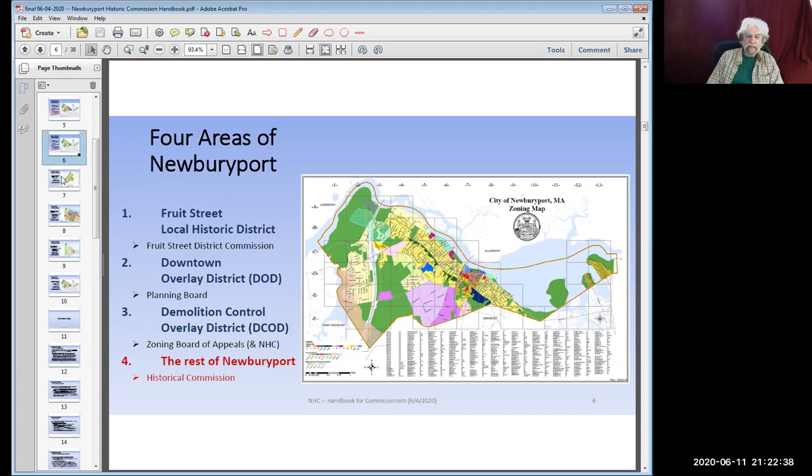So originally in the early 70s, they formed the first National Historic District down by the waterfront. And then the one we're operating under now, which is still on the National Register and the State Register, the so-called Newburyport Historic District, was done in the early 80s, and it's still in effect.

But it doesn't have regulatory power. It only rears its head when the federal or state government has to approve a project or give money, and then they do a historic review based on the buildings in that district. Because all that work was done almost 40 years ago, all of the buildings were inventoried, whether contributory to the historic district or not. We didn't reinvent the wheel, we just incorporate that work by reference.

Thank you, Jared. So this slide is about the Fruit Street District. Councilor Agam, I don't know if you wanted to pick up here. Yeah, I'll go fast, and then people can answer questions. I know 38 slides is a lot.

So the Fruit Street District, as I said, is the only bona fide local historic district. There is a scheme under Massachusetts general laws for these districts. This was formed about 13 years ago. There's a standalone commission that administers it. Obviously it's very small. The role retained by your commission is, if a preservation restriction, which is a contract, essentially a real estate right, you would hold that.

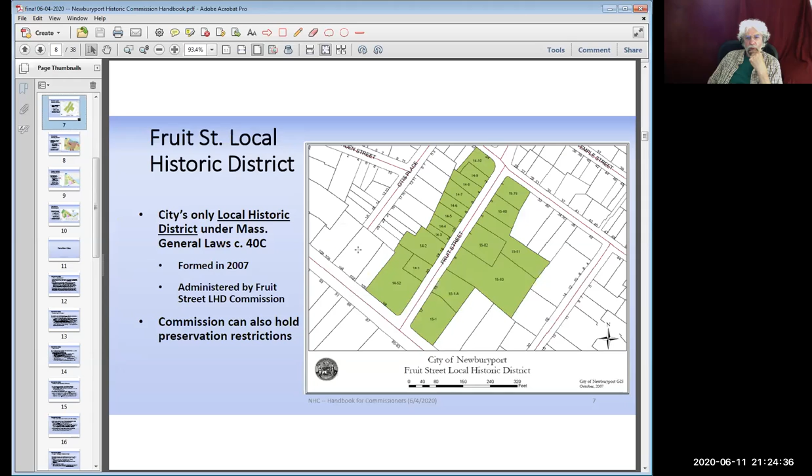Is the Cushing House Museum in that? Looked like it's on the corner there. Yeah, the Cushing House is in it. So it's not actually a standalone landmark. We don't regulate any buildings in Newburyport as standalone landmarks, although we think of them that way. It's contributory to the district.

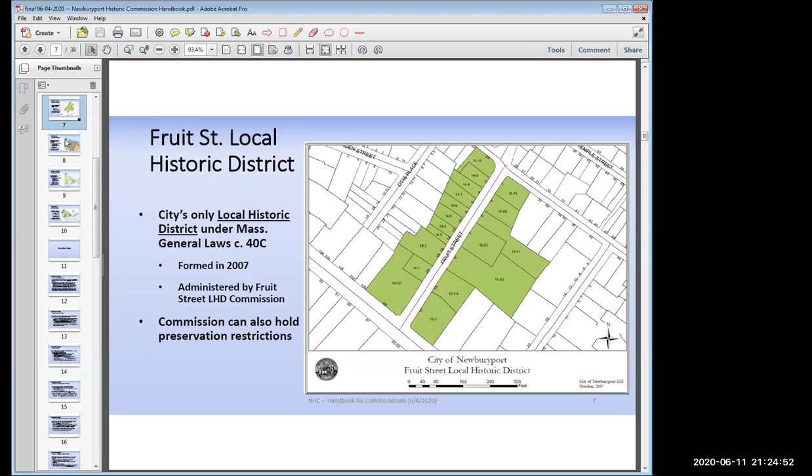So this is the downtown overlay district. This was the innovation that we came up with 6 years ago. And the reason why we needed to do it is they did try to form a local historic district in the early 70s when they were doing urban renewal, and it failed.

Instead, the only protections we had for all of the 1807 buildings on State Street and Market Square and so on were deed restrictions, because the Newburyport Redevelopment Authority condemned all of the property by eminent domain and then placed deed restrictions. They had a 40-year sunset, which expired in 2005. So between 2005 and 2014, there were no controls on these buildings for demolition or alteration. You could do whatever you wanted with them. That was a dangerous time.

We lucked out a little bit because there was a recession in there, so some of the buildings that would have been torn down, I think, were saved by economics. And the key in this district is, again, there was another effort to start a local historic district maybe 8 years ago, which again failed.

So the compromise was, okay, you don't like local historic districts, people of Newburyport, so you seem to have more trust in our planning board, and we anointed them to be the permit reviewing authority. However, they need the commission's expertise. So your commission, that second bullet point, that's a key role. A great example would be the windows on the Market Square building, the new Vera Restaurante.

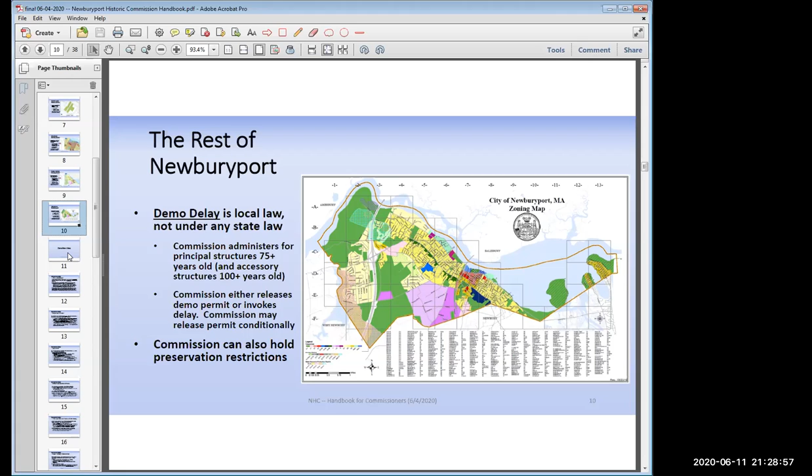Any building over a certain age—in Newburyport we use 75 years, and 100 years for accessory structures—before the demolition can proceed, it gets referred to you, and you decide whether the building needs to be studied as significant, and so on. We'll get back to that.

Okay, so demolition delay. This is a city ordinance, doesn't have any backup by state law, but you review anything that's an historically significant structure. You can read the definitions at your leisure, but the key is to understand what demolition is. It's defined very broadly. So for a building that isn't subject to all these other regulations, the sort of generic demo delay, these are all the things you have to look at, and it includes changes in roof pitch.

That was an important clarification because some real harm can be done to these buildings by messing with the roof, even if you're not tearing it down altogether. And then the exceptions are fairly obvious: antennas, electrical equipment, things also that are not significant to the building can be taken off.

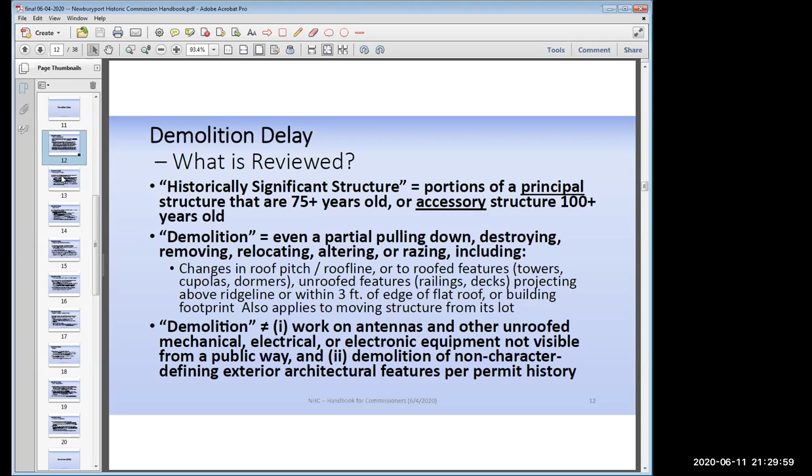Now, one thing you may not realize is that you can designate buildings as historically significant. There's that default rule of 75 years and 100 years, but these are the criteria you could use to be proactive and designate buildings for significance.

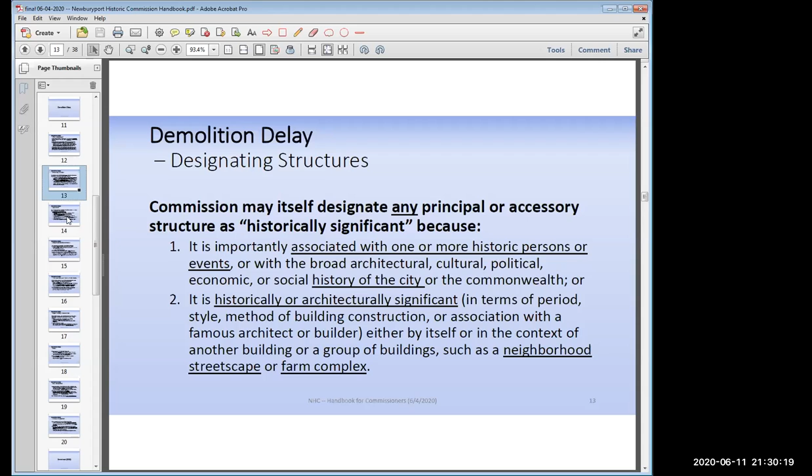And I would add that Caitlin, Jennifer and I, and Diane in our office, usually try to identify those things when applications come in. But if anything is missed for any reason and you notice an oversight, please advise us. We certainly want to stay on top of those things and make it clear to applicants that the clock is not ticking and their applications are incomplete unless they provide all those things, like Councilor Eigerman said.

Yeah, it is a team effort. That's an excellent point, because we're all human. Staff may miss something. Keep your eyes open. I'd say two items on that list, Councilor, that I typically see missing are...

the actual structural engineer report. We had photographs this evening and so forth, and they were pretty convincing. I don't think there was any real doubt about the structural deficiencies that were claimed, but I didn't see an actual report from an actual engineer, although supposedly one was done.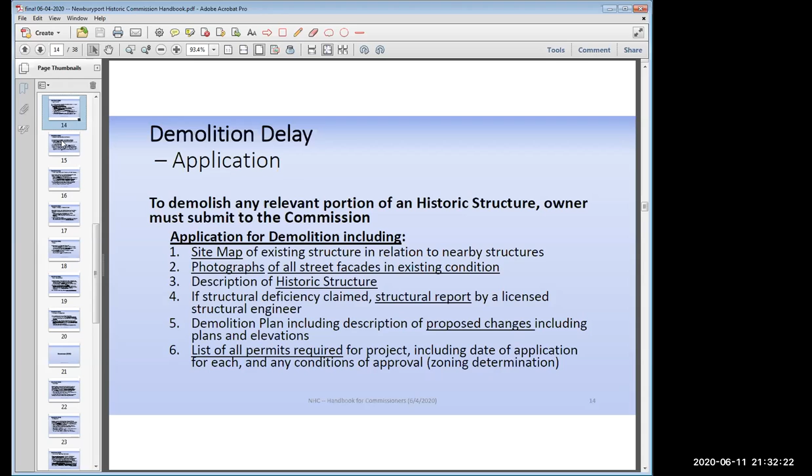I believe that the office considers my zoning determination to be that list of permits required. Okay, so where you check the boxes, like upward extension of a variance and all that kind of thing. Oh yeah, special permit for nonconformities as well as demo delay. Right, that is essentially a list of the permits required for the project. Okay, thanks, Jennifer.

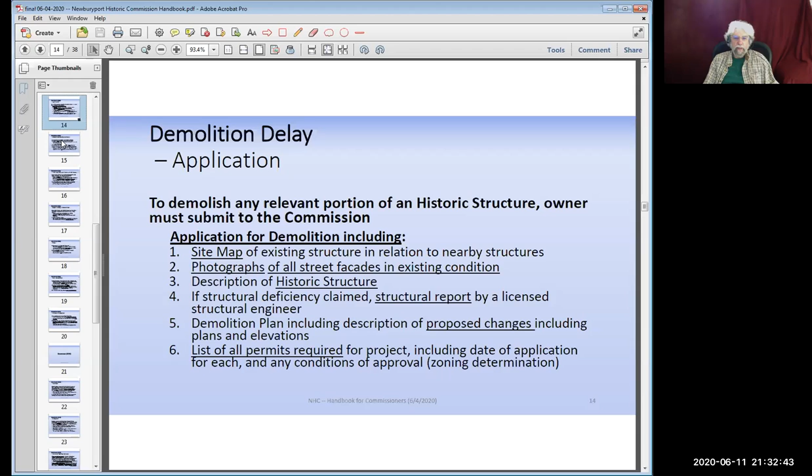Okay, so here's where it gets complex. This ordinance was written, I think, before most or all of us were around. But there's a 30-day clock once the application is complete. So when it says receipt, it's receipt of a complete application. The first task is: was the building actually historically significant?

Technically, this presentation where the applicant comes in and can argue that it's not historically significant is not the public hearing. A public hearing in Massachusetts is formal—you have to allow any member of the public to testify—whereas a public meeting is run more casually and speakers are at the discretion of the chair.

The purpose of this is to give notice to the building commissioner. So you have to quickly decide: all right, we got an application, it is significant, the applicant says it's not significant, we disagree. And then you give notice, and staff, of course, will help you write to the building commissioner and put him or her on notice that he can't proceed with any demolition permits. That's what the code says.

Until you're done with your review. Okay, then here's the public hearing. The public hearing is the big show. So within 30 days of receiving the application, and Jennifer helped me with this, in practice what you guys do is you actually hold it together, so you can do it in one night, that's up to you. But you do have to post notice, you have to mail notice, abutters to abutters, and that's where Diane Boisvert helps out. That has to be done properly. Those are legal requirements. The key really is, again, Secretary of the Interior standards.

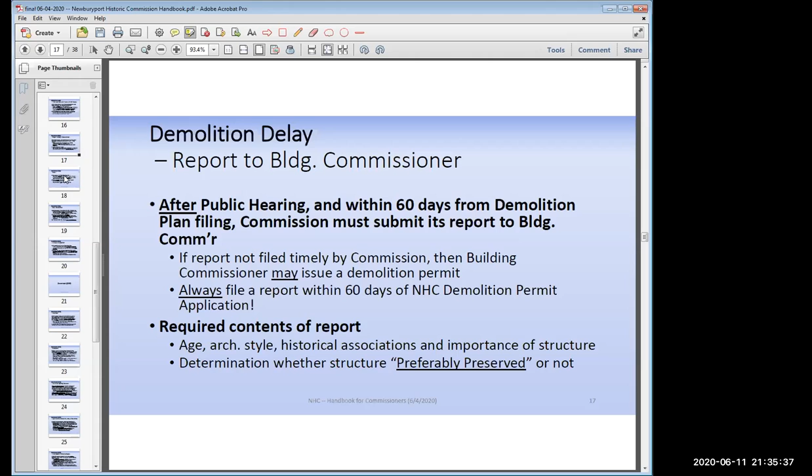By the way, you can interrupt me anytime and ask questions. I'm going fast because I don't want to keep you too late at night. Yep, that's fine, Jared. Go ahead.

So if the structure is preferably preserved, then the building commissioner is barred by law. No demolition permit can issue for 12 months. The way I look at it is the builder goes into the penalty box for 12 months, and it starts when the report is filed. If the structure is not preferably preserved, you can make that determination, there's no point in putting the builder in the penalty box, and then you've done your review and you tell the building commissioner, go ahead and issue demolition permits.

You can terminate it early. This, I think, is a key thing. So the applicant usually has to initiate this. They can submit an amended demolition plan. It's supposed to be during a regular commission meeting, so you should not be holding special meetings, which you don't need to bend over backwards, just your normal procedure. You don't have to hold a new hearing, you already held a public hearing for public testimony.

However, material changes give you the option to hold a public hearing because you may want to get input from the public, especially neighbors. Now, in order to cut the 12 months off early, you have to be satisfied of either of two things: one, there's a bona fide, reasonable, and unsuccessful effort to find a buyer. So the concept, whoever it was that invented demolition delay in Massachusetts was, well, we'll find a buyer who loves the house and won't demolish it. Doesn't usually work that way, but that's the concept.

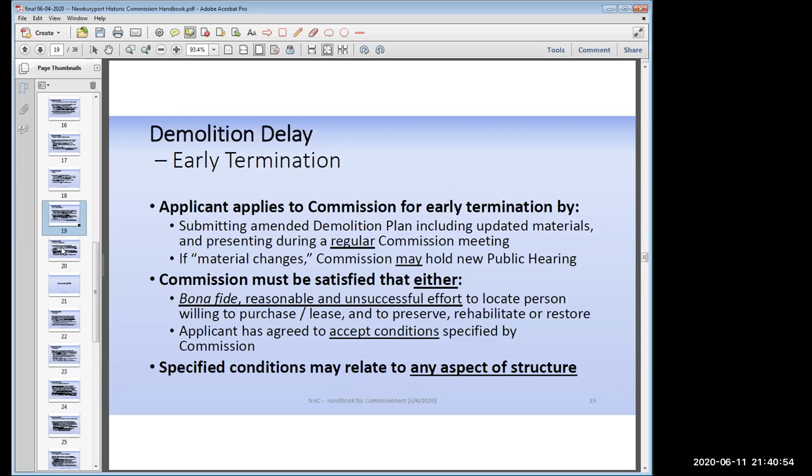Yeah, thanks Jennifer. That's what I tried to do with this Merrimack Street one again that we did tonight, where at the first public hearing, we went ahead and imposed the delay with the understanding with the applicant and their attorneys that let's continue talking, continue working. I think we can work this out, but the clock has started, and we can probably resolve this more quickly than 12 months. And it seemed to work out okay.

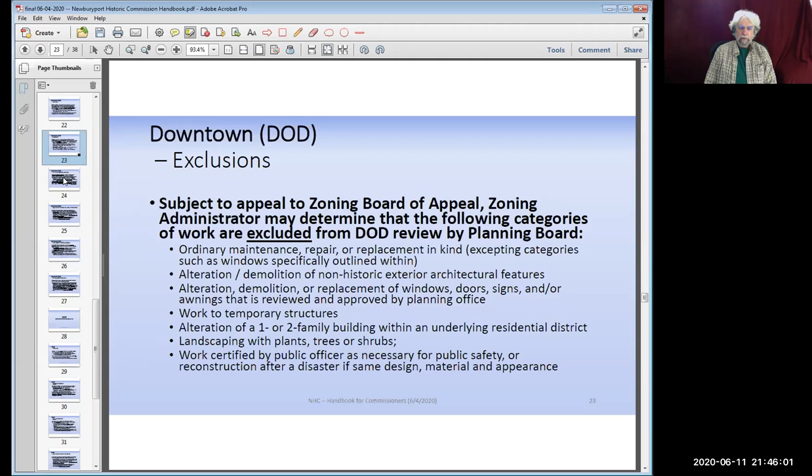Can someone give an example of what might fall into that exemption? Yes. If you go down on these exclusions, you see alteration of a 1 or 2 family building within an underlying residential district. There's still demolition delay that applies, but they don't need a special permit. Oh, I see. Got it. And again, to make it streamlined, Jennifer, as the zoning administrator, decides whether the exclusion applies so there's no argument. If someone disagrees with her call, then they go to the Zoning Board of Appeal.

So there's a lot here, you don't need to read it all, but essentially, with the exception of the 1 and 2 family buildings—which is quite frankly a political compromise—the rest is fairly intuitive. If it's a temporary structure like a tent, they don't need a special permit. If they're just doing maintenance and replacing in kind, they don't need one. If they're altering something that isn't even historic, that was added later and doesn't contribute to the building, they don't have to either. Another logistical exemption: we exempted windows, doors, signs, and awnings.

We didn't, at the city council, want to compel applicants—say on State Street—every time they changed a window, to go get a special permit. Let's see, landscaping, and then there's a disaster exception.

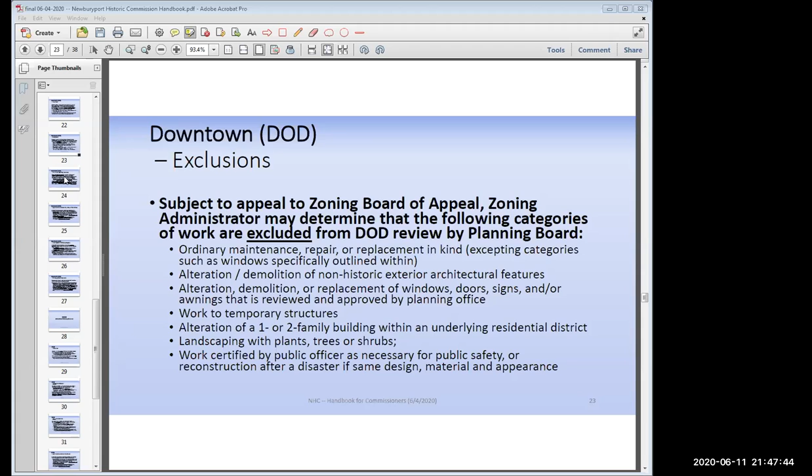Okay, what's a character defining feature? Well, there's a lot of legalese here, but the idea is that it's exterior, not interior, and it's anything that's understood to contribute to the significance of the structure when it was listed in 1982. Because again, we didn't want to have a new argument every time, we have copies—or I believe—of almost all of the data sheets, photos, and survey forms from 40 years ago, and those are all relevant.

Anything in connection with that district from those days has to be considered, and it doesn't matter when it's dated, because not all of the material was done in the same year—some of it was cobbled together over time.

The second bullet point is important. For example, there was one planning board member who did not understand that an exterior architectural feature is not necessarily a thing—it can also be a style or a general arrangement or setting. This is understood in historic preservation nationwide and worldwide. It's not just, for example, that a particular storefront is from 100-year-old wood—it's that the pattern and the type and the style is historic rather than modern, and that is protected as an exterior architectural feature.

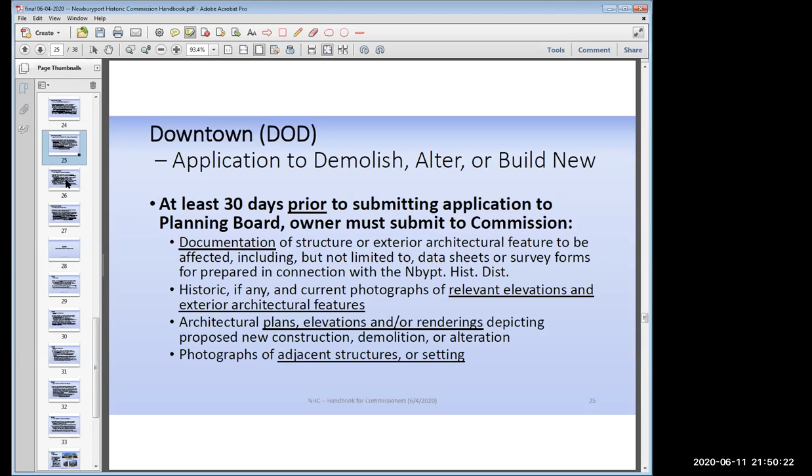Okay, so 30 days after you get a complete application, your report is due. It's pretty short, but that's what's needed. So for demolitions, you explain in the report the significance of a structure and its importance within its setting, not just the building by itself, but how it relates to its neighbors, because essentially downtown is an ensemble of buildings. That's why it's so attractive.

For all other work, there are specific criteria in the DOD that staff can point you to. We refine that over time. Here are the standards for storefronts, windows, doors, chimneys, or whatever. It's all in there. And again, don't be shy.

If you recommend to the planning board, listen, we can't give you all of the expertise that you need to evaluate this application, we specifically wrote into the ordinance that the planning board can request that the owner help them hire somebody who knows. So that's the whole point.

Now let's get the information. I would just add that setting is something that is very much on our minds with respect to 93 State Street, where they're expanding the back at the Institute for Savings, and how that affects the setting in its particular environment. Yep, those are relevant considerations.

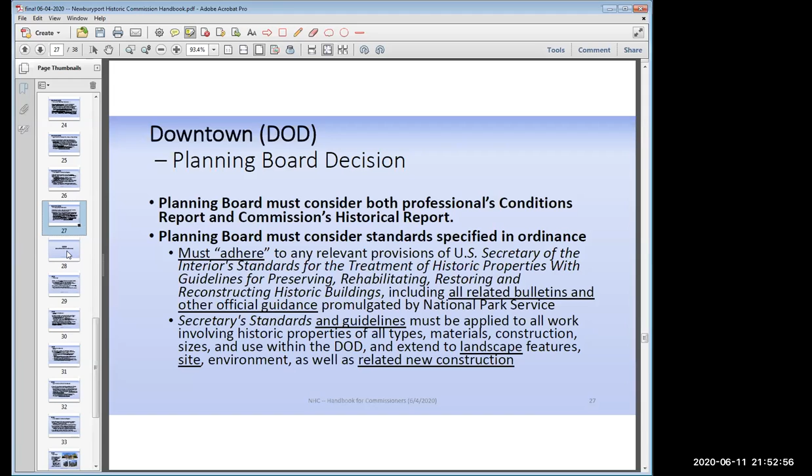Okay, now the DCOD is truly the most unusual ordinance of all. And again, it's everything in the National Historic District, so the old part of the city, but not downtown.

So the intent was there was political consensus across the spectrum that no one could really in good conscience justify razing, obliterating, putting into a landfill a historic building, unless basically the building can't be saved. Those are the special permit conditions that the zoning board is to make. It's not intended to regulate mere alteration, even demolition of character-defining features, because that was the deal. The deal was, all right, we're not satisfied with mere demolition delay, because all it does is give a 12-month reprieve to buildings that ultimately will be put into a landfill. So the focus of the DCOD is keep buildings from being destroyed, but it's not design review. That's the bargain. And then there's a list that staff has for you of all the buildings that are subject.

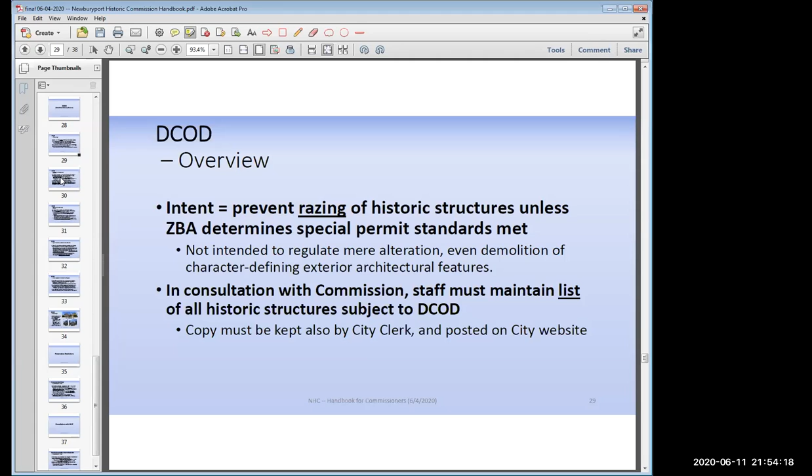Okay, so then we had to decide, all right, what does it mean to put a building in the landfill? We needed some practical rule. And the practical rule, for lack of anything else, was if you demolish more than a quarter of the walls, most buildings are rectangular, not all of them, but if you demolish more than a quarter of a contributor to the national district, you need a special permit to justify that.

The concept being, most times, it would be the rear wall that's demolished, and the rear wall is okay to demolish. It's the least public, and we wanted to allow adaptive reuse of buildings. It would still be recognizable if that rear wall were demolished, but not if the front were demolished.

It's true. Okay, so again, the deciding body is the Zoning Board of Appeals this time, because they dominate in the neighborhoods versus downtown. But again, they need your historical report, and look at the finding that the zoning board has to make. It's very strict, unless the structure retains, quote, no substantial remaining market value or reasonable use.

And they have to take into account, yes, the cost of rehab, but it's the codes for historic structures, not new structures, and there are many exceptions for historic buildings that the building commissioner can grant nationwide, not just in Massachusetts. So again, only supposed to get a special permit to demolish one of these buildings if basically it's a total loss and cannot be saved.

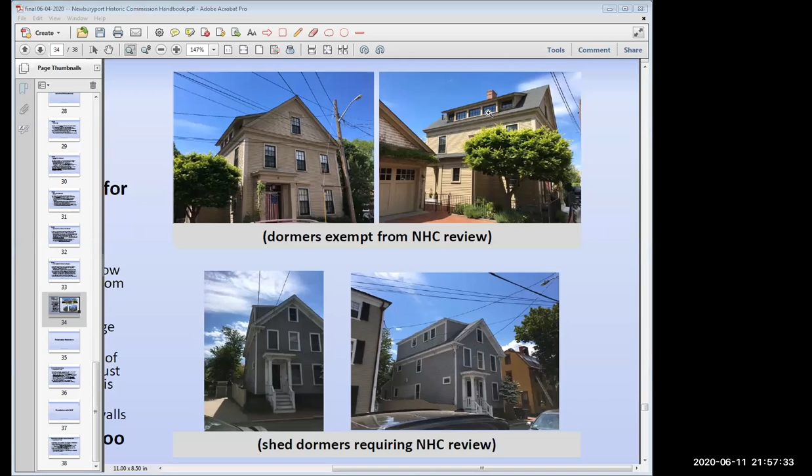The language on this, if you could zoom out and show the whole slide, was negotiated with several builders who cooperated, guys who have been around for decades, so we could reality check what was reasonable.

Jennifer put her finger on it. What we don't want is people calling something a dormer that's really a new floor.

Okay, so non-contributors. If it's not a contributor, because there could be buildings that didn't get listed in 1982 that are in a neighborhood, there's still demolition delay. And again, you have the power to designate something as historically significant. We've never used that power that I know of, but you can.

So Jared, how would that be triggered? Jennifer, when that comes in, if it's not listed as contributing on the list, would someone have to decide to have the historical commission look at it?

I would call it out if they were making a roof line change on a structure in the DCOD that's not listed as contributing, but they're making that roof line change. I would trigger it for a demo delay review process.

Okay, you could look at the structure and say it's old but not contributing, and then release it. Or you would not invoke demo delay. So it'd just be part of the demo delay process. Okay, thanks.

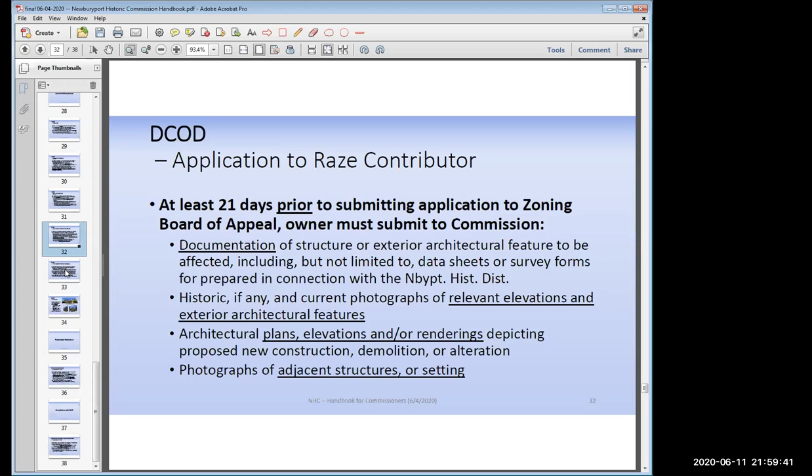Shorter timelines: within 21 days after the complete application is received, you're supposed to give your report. Again, this is about relative importance, not just of the structure intrinsically but in context. In this ordinance it refers to the city block, but it's the same concept — the ensemble, the context.

Again, the ZBA used to be sheepish about it, but they can really insist on a professional being engaged, and despite what some builders may say, it's not that hard to find professionals to do this work. And again, just as downtown, the zoning board must consider these reports — they have to consider your historical report and whatever conditions report comes in.

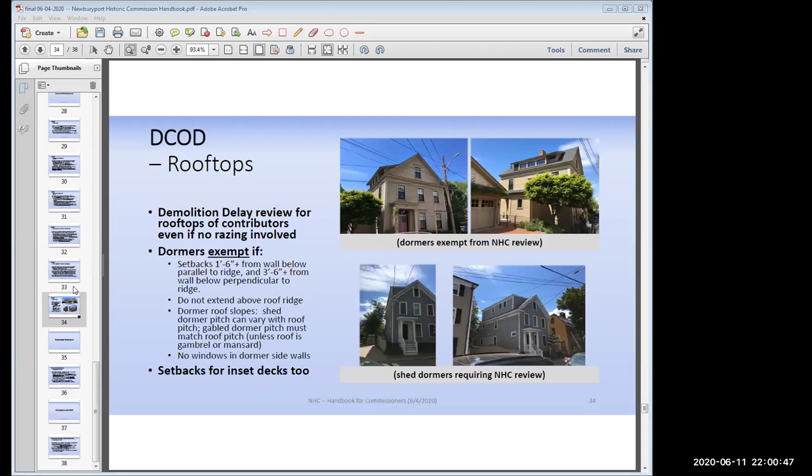Did we go back? What happened? Hey, I wonder if I could have a quick question, Jared, because it came up tonight that we were reviewing that one on Monroe Street, and the attorney was saying that the only thing we should be concerned about is whether what they're planning to demolish is going to remove something historic.

But reading this, it seems that relative importance of a historic structure in the context of the city block could be interpreted as including the comments I was making — that we might want to have something in our historic report saying we think the overall size of what you're planning to do has a bit of a negative impact on the neighborhood or something like that. So is this a case of interpretation, or what?

Well, it's a tough one. I can say I don't think we contemplated that. Again, it's the importance of the structure. So if they're demolishing a structure which currently fits within its context, in scale with its neighbors, and they're replacing it with something that sticks out like a sore thumb, that is absolutely relevant to your report.

Yeah, this one's kind of boring. Okay, so it's getting late, so I don't want to interrupt with too many questions.

All right, and then finally there's some miscellaneous tasks we turn to, and that is we need advice on these preservation restrictions, and I'll explain what those are. It's really an easement, just like you can have an easement to park your car on someone else's land. The city, the historical commission on behalf of the city, can take an easement on a building.